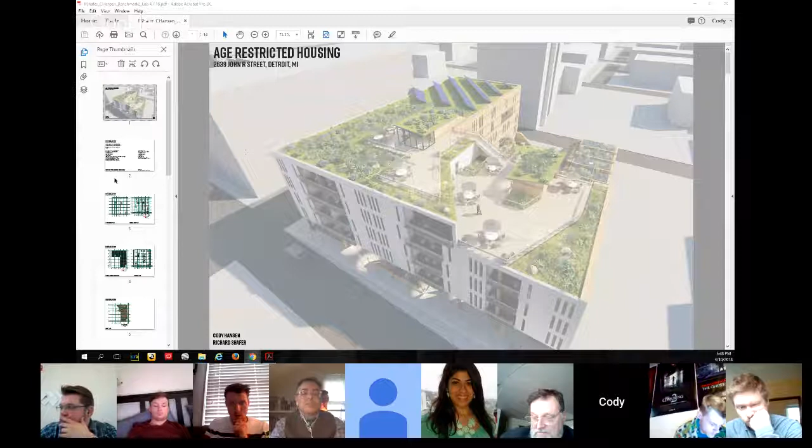Starting off with our structural system, we have the rammed earth that goes throughout all the floors of the building. At the garage and main floor we have concrete systems, and above that we have heavy timber, and those two systems work together with the rammed earth.

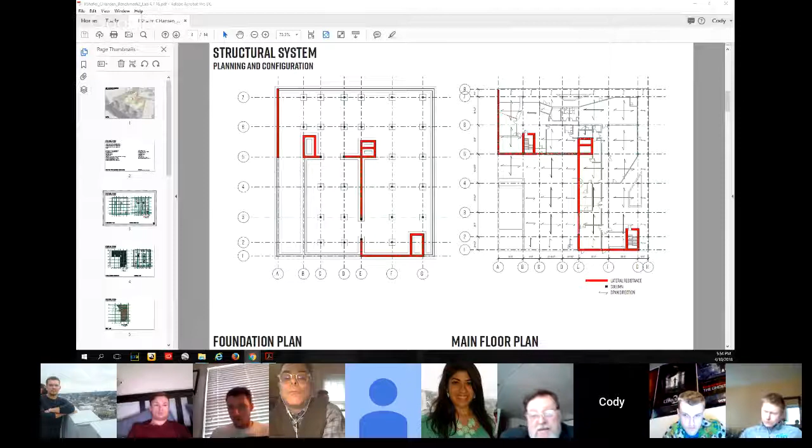Are they in all of the bays? Yeah. Okay, then you definitely need to note that. And look, guys, I'm not averse to having a 3-sentence description that describes something in a bit more detail—you can even use that as your prompt if you're presenting it.

Right, this is what I need to say in 3 sentences—this is how this system works. Okay, thank you. Let's go back to the notion of size and scale again. I appreciate I can see it on the screen, but I do think these could probably be about half the size they are and still be legible and effective. I'm just trying to give you clues on how you can condense things.

We get into the next slide showing their typical residential plan and our garage plan, obviously in the same style as before, with comments showing how the moment connections in the columns are noted. For the typical residential plan, we have the heavy timber beams and columns shown along with the floor trusses. Is this a mass timber system?

Everything except for the floor trusses is mass timber. Okay, so I guess just a graphic issue—when I see the black lines there, that doesn't represent like a joist, does it?

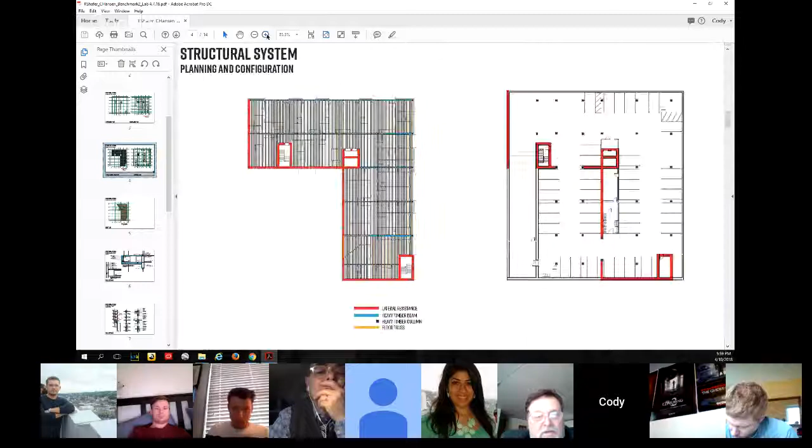Go back to the plan view of the framing for a minute, or the typical residential floor. Zoom it, zoom the upper right corner. Zoom the right corner, between 6 and 5, and G and F. To the right, yeah, we're at 6. Yeah, right there, zoom that more. Okay, just a second, show me the balcony there.

Okay, yeah. So I'm looking at what look like to be the large trusses parallel to the balcony, correct? Yes.

Now, when I look at your detail, can you go to your detail? Zoom out please, sorry. It appears to me on the right side the truss is perpendicular to the balcony. Good point. Okay, I'll let you go from there.

And I think, as Professor Farlow pointed out last time, there are some issues of insulation. I'm not sure you need to fully insulate the balcony per se, but I think you want to insulate it close to where the exterior wall is. Does that make sense? Yeah.

And also, of course, there needs to be the insulation shown in the walls, right? Well, they do call it out, they just don't hatch it, it seems. And also remember what we're asking for. We're asking you to meet the ASHRAE 189.1 code for the R value, right?

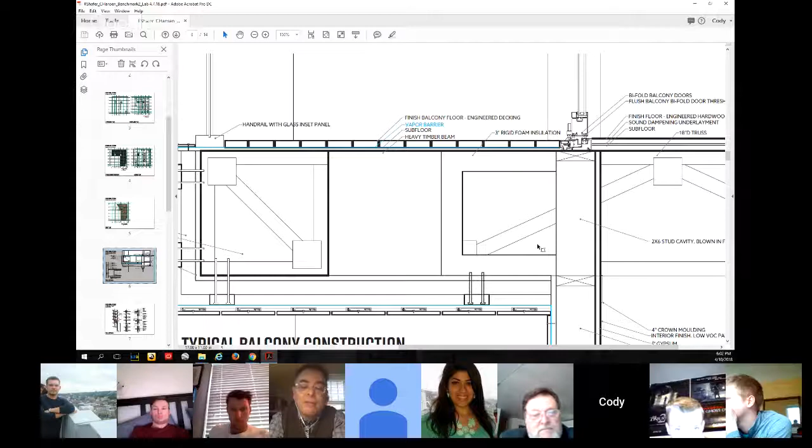Well, first of all, the code does allow a 4-inch offset or differential between the main floor and the surface of the balcony, and that's actually to everyone's advantage, particularly in any environment where you're going to get wind-driven rain, which is pretty much anywhere, and snow, which is pretty much where we are. So when you have a condition that achieves that 4-inch offset, it allows any standing or ponding water or snow to be less inclined to migrate or wick into the interior environment. So that's maybe where you were headed, Dan.

Yep. Also, I want to find that I have a level base when I drop that bottom condition of the slider in, and I'm kind of wondering what that, I don't know if you'd call it a sole plate or a sill plate, would be like if there's nothing above it. So I guess this question is also starting to go to the section and what the structural system could be. I know what you're thinking it is.

It's these pre-engineered wood trusses, but maybe because the balconies are so shallow, we could header off these balcony areas and do incidental cantilevers, basically 2x12s set at an elevation that allows for or promotes the offset, and the thickness of the balcony could be much less because you're only skinning a 2x12 structural deck. In the north-south axis, you could sister 2x12s to those pre-engineered trusses in order to let them outrigger and become the balcony, and header them off of the trusses running in the east-west direction, I believe.

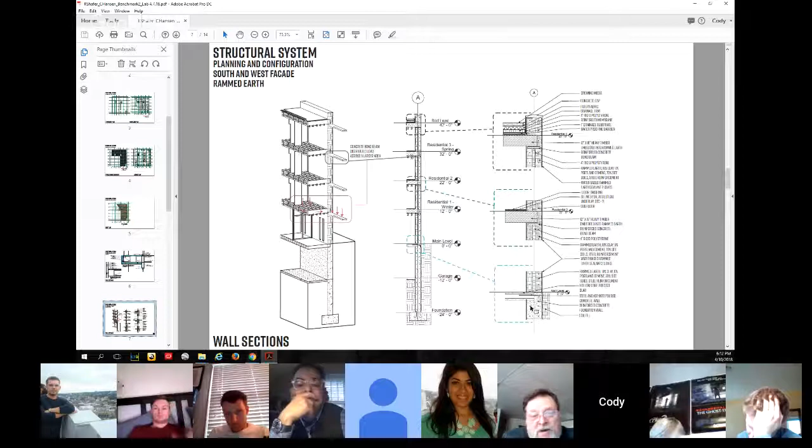Can I zoom on the upper right? Green roof side, well no, to the right, yeah. So I'm seeing the 12 by 18 heavy timber, and it looks like you cut right through the timber beam in that section. Is that right? Yeah. Normally when we see a building section, it's not through the structure. Right, so in other words, you're going to be in front of it, and then we see the other things framing into the heavy timber, right? Right, this was just to show us how this was being embedded in the rammed earth wall.

I understand. Okay, and then it looks like the thickness of the rammed earth to the right side of that beam is very small, is it stable like that? That's still about, I guess I need to double check that thickness there. Okay, but embedding it in the wall, you still have probably 4 or 5 inches worth of that. Usually too, when something's embedded in the wall, there's always a gap around it for movement and tolerances. So you're showing like no gap, right? Just completely packed, so we should provide some kind of slip, I suppose. Yeah, okay, and looks like a reinforced concrete bond beam is being called out there, right?

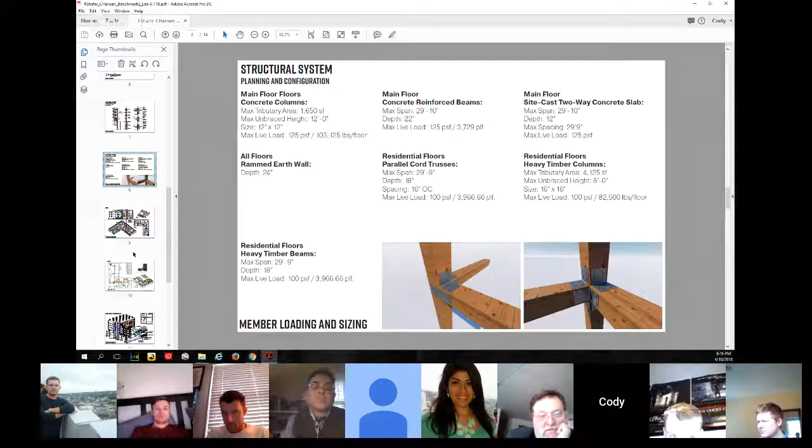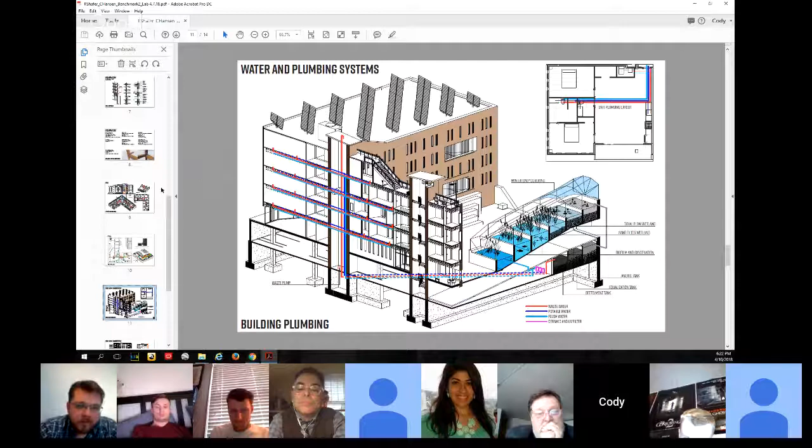There's not really much else to discuss on this particular drawing, we'll move on.

The water and plumbing systems. This is the fire suppression here, okay, and how we've laid it throughout the apartments and the sprinkler heads within the apartment and our hour separations.

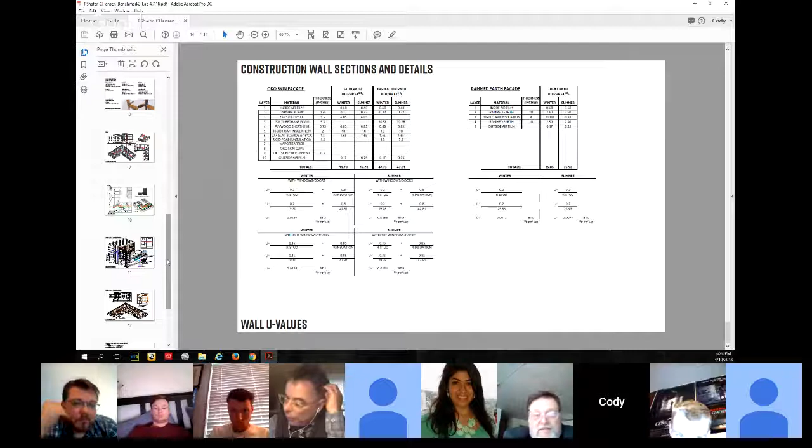Mark, are you with us? My only point is that on the upper right section drawing, where you brought up the point about insulation thickness based on 189.1, I have a feeling that 4 inches may be the base dimension, it actually may be more than that. I think that's what Professor Farrow is saying. That's what I'm getting at.

But also, the roof is going to have to drain, and usually the insulation provides the drainage profile, right? So we'll do saddles, guys, to promote that drainage. There actually may be 6 inches of base insulation that achieves the design value you need up there, but you may have another 6 to get that drainage to the low point, which is where the roof drain is. My point is that ultimately that parapet may need to run up higher vertically, right?

And so that's just something that you need to be alert to. You all need to be alert to that.

In this particular detail, we used a 1-inch drainage substrate on top of the waterproofing barrier. I didn't know that it was typical to use the insulation as the drainage layer.

Well, there's 2 ways to do it, right? Like if you're doing a 1-story Kmart, do we even have those anymore? So Best Buy, no, we don't have those anymore. So if we're doing a 1-story commercial building, we'll profile the steel joists, right?

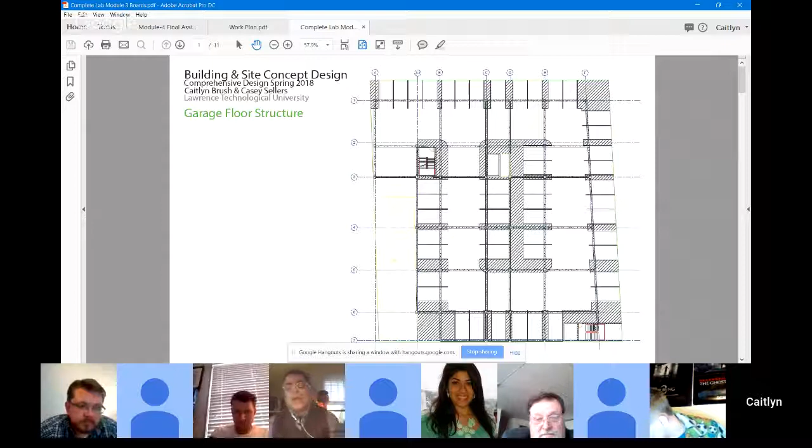You actually have two — oh, you have an A, 8.1. I see that now. Okay. What I liked about the column sizes, the column bubble sizes on Richards and Cody's, is they were a little bit larger than customary, especially if you're going to reduce these down. Scaling up the column bubbles so critics can refer to them in conversation would be courteous.

Can we scroll down to the lower right, please, and zoom in? I'm sorry, I'm going to pick on things here, but we're getting to the end of the semester. So, Professor Farlow, do you understand how that stair would work? Or is there a structural member going through the stairs? It sure looks like the angled column or beam that runs parallel to John R is slamming into the stairwell.

So there's either got to be another column at the stair wall to receive it and end its run, or we have to slide the stair. Okay, yeah, you understand that? Yep. So that beam has to get headered off — it has to end, and transfer that load. So a column or pilaster there to receive that thing.

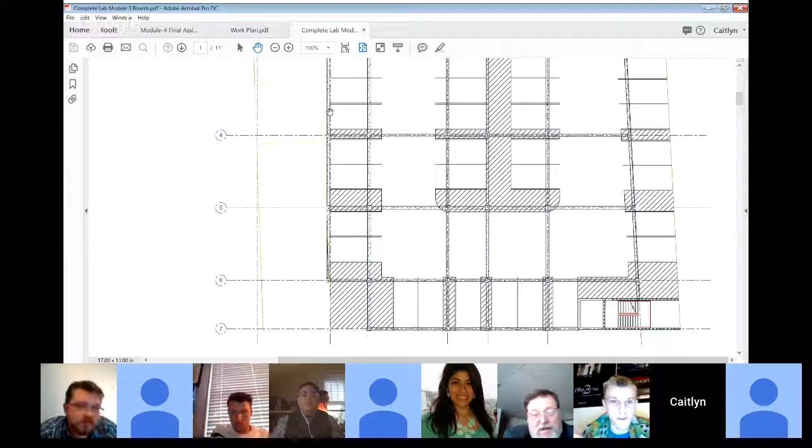So while we're on this topic, if I cut a section through this building and look at the area to the right of the wall along column line 1, going up to the property line, obviously there's going to be a slab roof there, correct? Wait, along column line 1 — one that's at the top. Go up to the top, between column line F and the far right hand edge of your parking deck. Yeah, there's a slab there, correct? Yeah. Otherwise water is running into your deck.

Yes. And I don't know, is that slab part of a floor above, or is it part of an outside green space or walking area? There would be walking area. So it's outside? Well, no, a little bit of it is.

So F is offset about 2.5 feet in from the wall because our first floor isn't the same as the residential floors. So that's about 2.5 feet extra to the right where the residential floors would be, but past that 2.5 feet towards the site line would be the sidewalk area. Is the load going to be transferred from the residential floors up above down adequately?

It should be, I hope so. But let's go to the next level above that then. So you can see to the right of the column, that's where the storefront is.

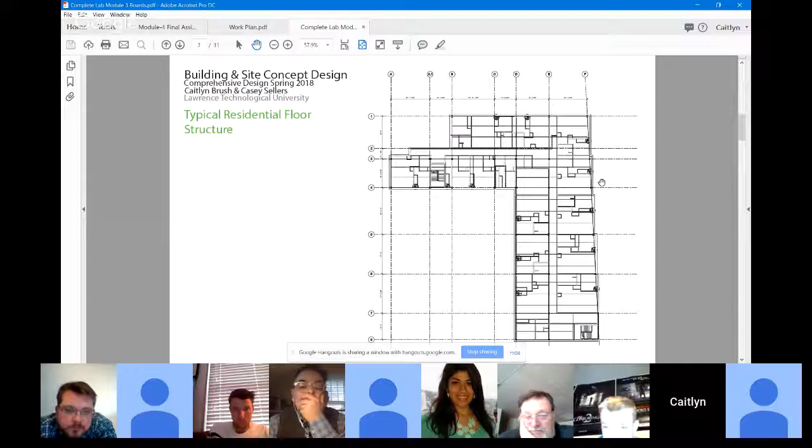Well, it's hard to see on here, which is kind of obnoxious, but I did highlight the core areas, and I haven't chosen which walls in particular, but I have. I see you have some common demising walls that are consistent throughout column 5 and 6, and 7. Yeah, 5, 6, and pretty much the entire. It's too bad 2 doesn't line up, but that's okay, it would have been nice. And yeah, so 5, 6, 7 is the same throughout, and then the entire hallway on the east wing lines up through all 5 floors.

And your structure description, you didn't call out the code issues yet, and you didn't call out what it's made of, is it concrete or steel or what? This is steel on the residential floors. The concrete below? Yes. Okay, you got to call all of this out, right? Yep. Are you using the upturned beam for the steel to reduce the floor depth?

We were using the calculator you sent us. I know, but of the different structural system options I gave you guys back in module 3 in the studio, one of them was steel—it's called an upturned beam, similar to the delta beam but a variant form for steel. Did you look at that? No, we did not. That might have been a way to reduce your floor-to-floor depth.

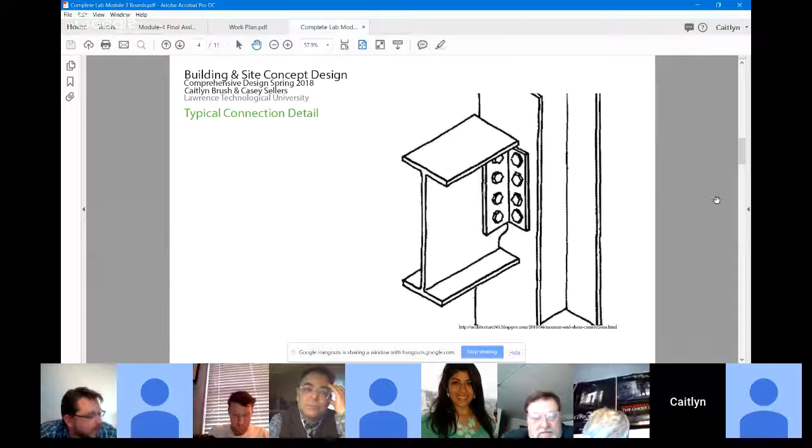And then we were just doing a typical bolted section, since we're not using a rigid frame. That's a pin connection. Right, and it's way too large—obviously. When you mentioned it at the beginning of class, I knew exactly which drawing we needed to scale. You know how to draw that for your real project, right? It would make more sense to see it in the context of your real project.

And then I think we get into plumbing. So we have a main shaft with HVAC and plumbing at the alleyway, with cold water supply and hot water supply. So you have a central unit then? Yeah. You need to call that out—tell us what that central unit is. Is it a high-efficiency gas-fired boiler?

And then those pipes are just running underneath the slab in the drop-down ceiling, which I think maybe the section could be blown up so you can see that, or at least made a little larger.

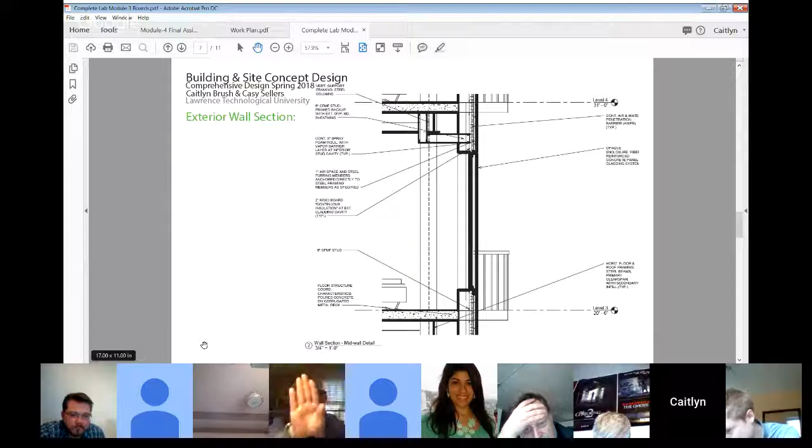Caitlyn, I don't know if you saw my note before we went live, but I still feel like the window itself, as a condition, needs to sit on the studs, not on the insulation. So I think that has to push in more. I changed it. Okay, and that also means that the horizontal conditions of the window, which we call the lintel or head, and the sill, need to be deeper. So do the jambs that run vertical. But those are opportunities for you to emphasize their presence on the skin.

And I'm not just talking to you guys. If you've ever looked at some of these more contemporary buildings where windows are highlighted, think of highlighting in terms of the color orange or the color yellow, where the window becomes like a picture frame or an exaggerated sun shade, like a brim or a blinder. You'll see this in the work of some architects, like David Baker, Loha, for example.

Some of the case studies you guys have pulled up are exaggerations or extensions of the jamb, so those are design opportunities for you guys. And there's not a clear indication of a lintel yet.

Yeah, that's correct. I also see insulation being identified in the notes, but I don't see the insulation in the wall in some cases. And then again, immediately after you draw this, or even before, the question of what is my R value needs to be evaluated, right?

I would say cut that in half, make it about half the size. And then put that wall section you've got drawn on the left side, put it right next to it so that all the horizontal elements align.

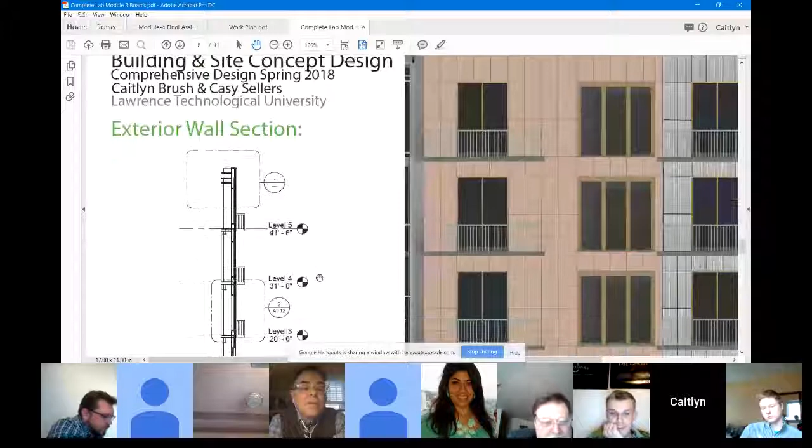So now going back to that issue we talked about earlier today when you were showing me the parking structure and grade floor structure, do you understand the problem there? It's like my building starts disappearing into the ether at the parking level. Yeah, there should be another wall. You understand that, right? Yes.

Okay. You've got that exterior storefront glazing sitting on a transfer beam, a consistently thick slab, when in fact there has to be some structural response to that at level 1 and in the basement. That's what I'm saying. Right, and that whole section needs to be enclosed, and it's not. Yeah, there should be a retaining wall to the right.

And also along this drawing, you'd probably want to know where the sidewalk is. Okay. Yeah, this thing needs to be just a little bit wider. You need to show more of the interior and just a skosh more of the exterior at -9 to 0. Yeah. Yes. Okay, thank you.

And I understand these are the hardest things you're going to be working on in terms of technical detailing at this level and for this class. Professor Farlow and I get that, we get that. So don't feel bad if we have a lot to say. Okay, yep.

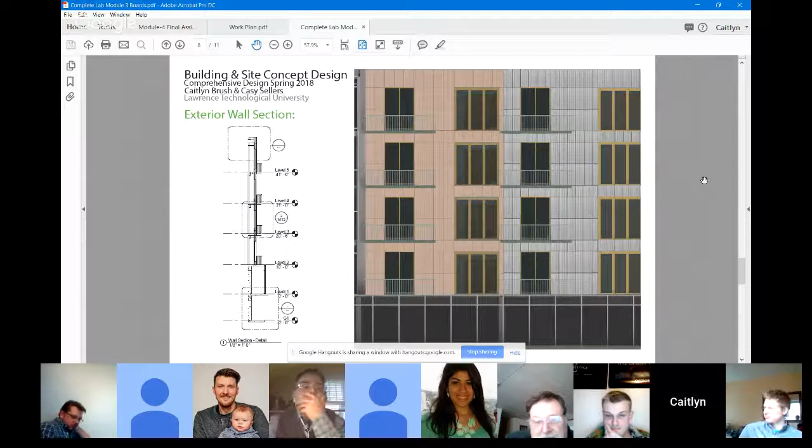You should lead your discussion about HVAC with that description: my system has these elements, this is why we selected it, and then proceed to explain. Does that make sense? Yeah.

I want you guys to make sure you see that stuff when you're putting it down. All of you, I'm not just saying it to you two.

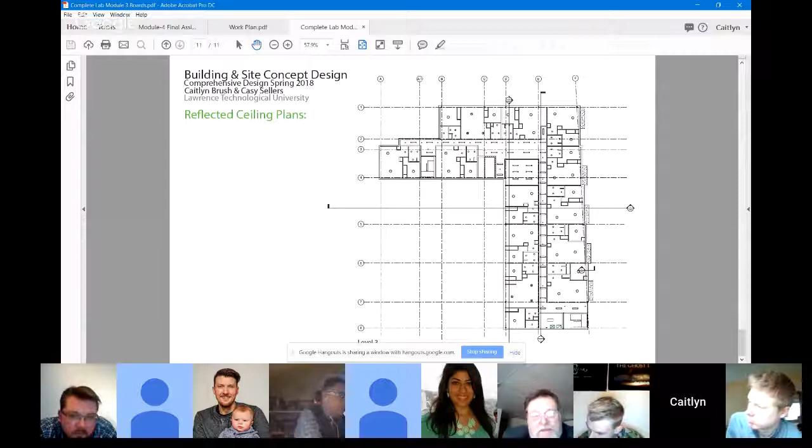Okay, keep going. Probably emergency lighting - I don't know if you need to show it, but there's going to be emergency lighting in the hallways and in the exit stairs. Might as well just call it out. Yeah, I wasn't sure if I should add that in. It's not a difficult thing to do. That was the last of the drawings.

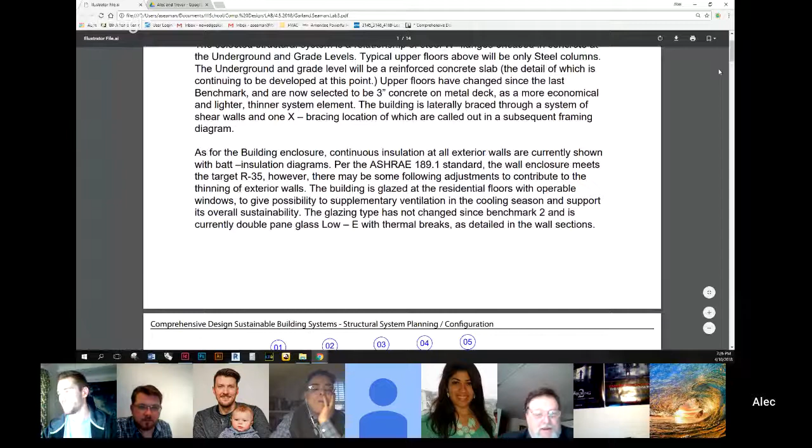Okay, go ahead. So I'll start with ours. I won't read all this word for word, but we have a brief description of our structural system. I will note that there's one change from the last time we presented this: on the typical upper floors, our floor framing system, we're proposing to switch to concrete on metal deck because of a conversation about the economics of the system I had with one of our structural engineers at work. But at the parking, first floor, and underground floor, we're sticking with reinforced concrete slabs.

So going up to the upper level, why would you have the metal deck with a concrete system? Switching to all steel up above, all steel for the beams and columns, but for the floor slabs proposed to switch to concrete poured into metal deck. Yeah, that's basically a steel system. Okay, we were talking earlier in the semester, we were considering the post-tension slab, and now we work with the steel columns. But I just wanted to make note of that.

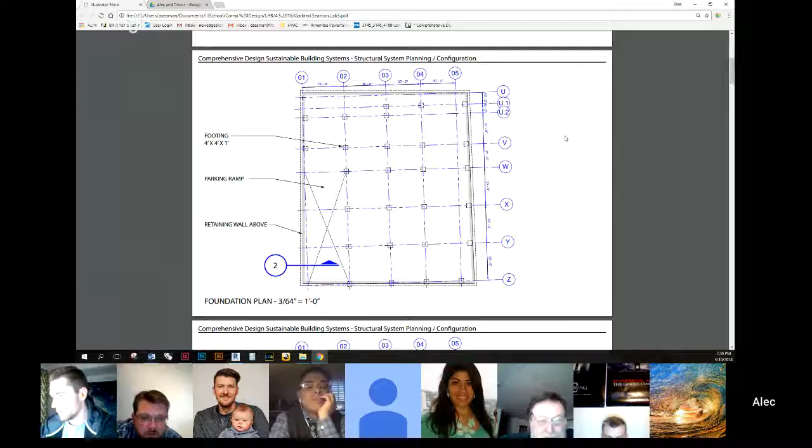So then I do think the inclusion or acknowledgement of the pilasters along those outside walls, even if there are beam caps or beam pockets there, it's still probably a reality in this project. Okay, and along column Z? Yeah, column line Z, I definitely think along column 1, along everything on column 1, given those spans. Okay, go ahead.

If you want to go to the next sheet, Alec. The one after this? No, sorry, that one was good. So then this is the parking floor framing plan where you can start to see, Professor Farrows, what you mentioned — a bit of a bizarre condition up at U to U2. That was because of the angle we had to introduce another column line so that we could fit the parking in, and that it would work with the orientation of our column grid. I would also say along column line Z, those long beams, you do need a pilaster condition again. Okay, I have that written down as a note. That's okay.

I think a watermark of the floor plan would be helpful - I'm hesitant to say that, but at least show us the vertical core elements like the stairs and elevators, since they're going to be chases there and will have an impact on the framing plan. You can't tell the engineer what the framing should be unless you show them. That's something we have to insert in there.

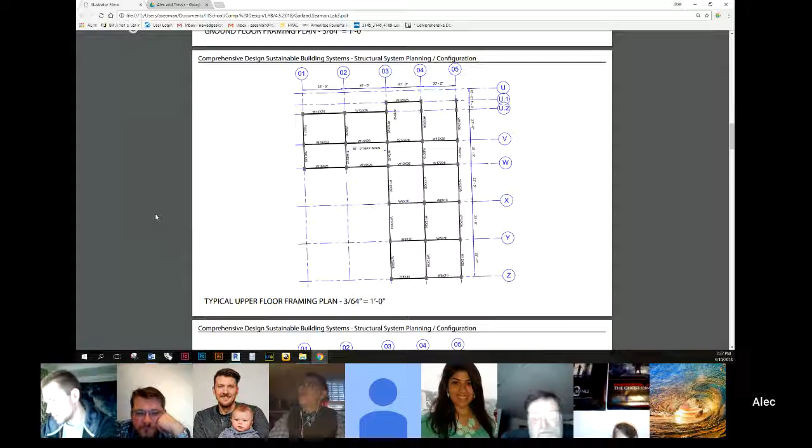Okay, I'm going to look your image up. I'm struggling to remember what this looks like.

I'm sorry, who are we looking at at the moment? This is still me. So you're looking for the floor condition in the plan? Is that it? I'm going to show you.

Okay, so this is the second floor. This is an outdoor terrace. U1 and U2 are here, between 4 and 5. But that's a terrace that has a slab with an edge. Yeah, so there's steel but there. On the next floor up, it's open here. So okay, but then I think U2 is in. Right, yeah, U2 has a beam. It would be in U2.

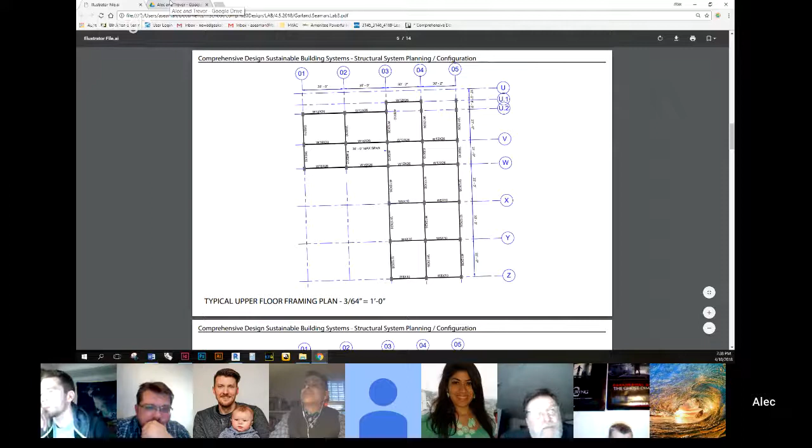You guys have got to put chords and struts on the edges of floor diaphragms, for stiffness and stability, okay? There may be some cases where you don't need to do that, but for the most part you do. Okay, yeah, that makes sense now that we have the reference to our floor plans.

Alec, do you want to go to the next one? If you really didn't want to see it, if you'd used an upturned beam in steel, it would kind of disappear into the slab depth. Okay, but yeah, I'm looking at plate 14 in your slide deck from the last benchmark. You definitely have beams there, you've even drawn one in the rendered axonometric, for along column line U2?

Yeah, okay, so that one needs to find its way in. And you'll have it at, I think it's U1 as well. This is the U2 column, yes sir. And U1 is north of it. Double cantilevers are not easy to do, they're difficult to do.

Yeah, that's right, optical illusion. I didn't even catch that you're not indicating a column at the hard corner underneath the upper two floors. The way that you will sometimes see them done is they literally take the two walls you're looking at and make those two walls into trusses, that span back to the column in the adjoining bay to the right and to the left. Okay, that is not indicated necessarily.

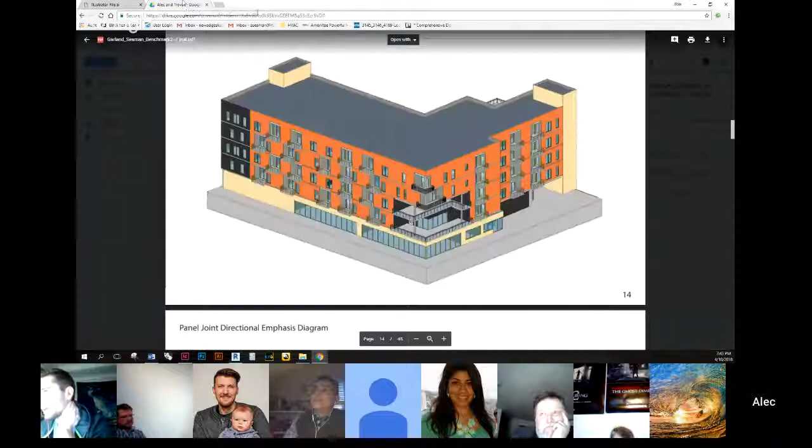Unfortunately, with our whole well, you do have at O2 between V and W, and that I'm not sure, and O3 between. I don't think you could put a demising wall in at O2, Mark. I think they use at least between V and W, yes, but I don't think it exists in that one. Right, but I guess I'm just okay.

But we'd have to revisit the program if we were going to do that. The only thing is it wouldn't work on the ground floor as it runs through the common room. Right, but I'll note that as something we can continue to look into.

I'm looking at this, and I think that maybe W could be a line. W could be a line. Yeah, and I think that's one that they've got - other than the bottom wall of the elevator. Other than that, you don't really have much except for O3 between U and W. Those are the two that could be set up as some sort of shear wall.

Or diagonally braced system. But again, the rigid bays are at least less obtrusive, and you can kind of put them anywhere. So I would start with the boundary of the exterior as a possibility.

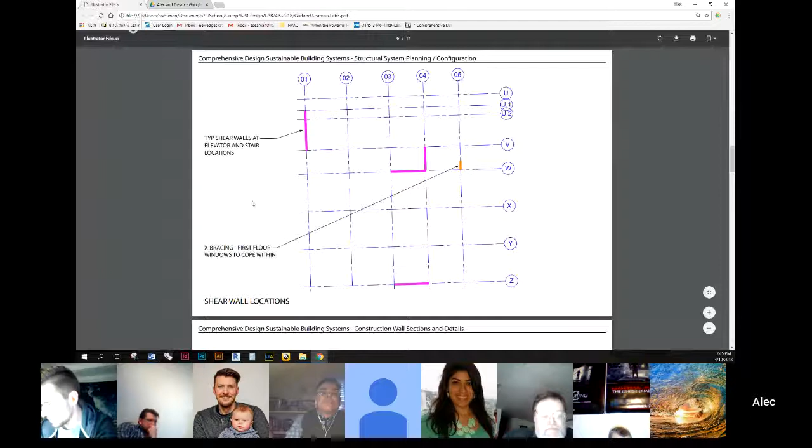So here we have the wall section and then the partial elevation. I think the elevation I can probably colorize to give it a little bit more meaning and information. It looks like things are dropping off on you - yeah, the column lines for some reason I could not get to return, but I'm looking into that. These are still continuously being developed outside of the PDFs as well.

But I want you to go to that lower left-hand side corner of the wall section, because you and the prior team have the same issue. Oh, you're talking about not showing the beams. You've got the projection of the boundary condition of the wall and the floor of the parking that extends beyond the structure, right? Does that make sense? Something's got to happen in there.

Yeah, there should be a beam, I think, showing beyond that carries the load over to the retaining wall. I'm also looking at the fact that the exterior wall is eccentric of the beam. Can you zoom in on that wall section to the left? Go to the lower left. Yeah, you've got about an 18-inch or 1-foot offset from beam to wall above. Do you see that?

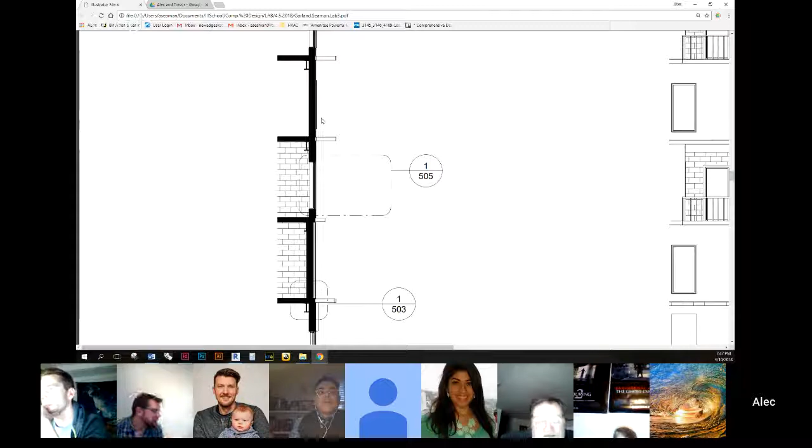Why would it be offset below but justified above? Well, it's close to justified above, but it is in the same location. But I would still see - I think it's just that the columns aren't showing up. Yeah, I think that's my point. At the top of that drawing somewhere I'm going to see a column bubble, and then some lines leading from that I-section back to where the column is, because it tells me it connects back to it.

Here's one more comment I'm going to make for everyone, not just you: do not trust Revit. I think we all know by now that things we see in Revit are not necessarily what we would expect to see. For example, things that you don't cut through, let's say concrete, shows up with the concrete stipples that looks like you have cut through it, right?

So I know it's easy to jump into Revit and show the section because that must be what really exists. And it may be, but it's not going to be in terms that Professor Farlow and I understand as normal section cuts. So my suggestion is to anticipate you'll be going into Illustrator or Adobe, doctoring those wall sections. You'll be taking out poche or solidity of material where it doesn't need to be there, and adding back lines that don't seem to be there. Things like flashing are not going to show up.

I do have a question to that point. Should we just poche at this scale the elements we're cutting through in the overall wall section, or do you want that to be something that gets doctored? In the wall section, it ought to be the materials in their best description as they are, as they exist. It should be the best representation of the materials as if you were in the construction systems class.

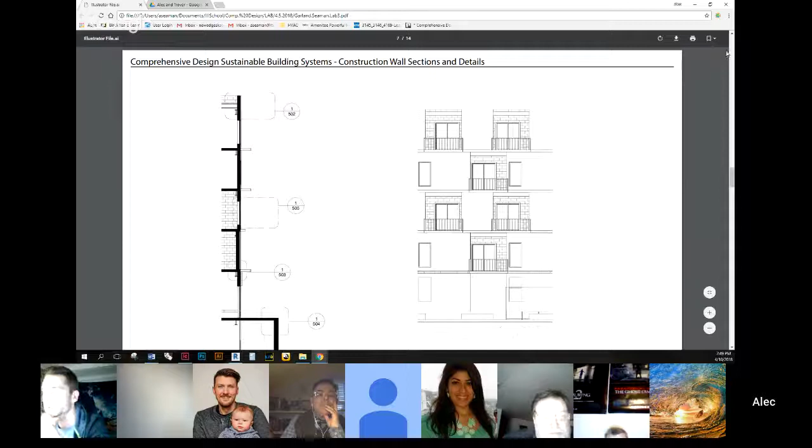That's the best suggestion I have when you're doing the details, wall sections, and enlarged elevations. It's nice to color the enlarged elevations and give some depth, shade and shadow. But when I look at a wall section, I'm thinking I'm in the construction systems class - plan cuts or details. Does that make sense? Yes.

Again, I know these are not easy, we all get that, so don't worry about how many comments you get. It's absolutely helpful. I don't think I have any more to deliver on this slide unless there are any more comments to help out.

Could you zoom that again? Could you zoom the upper left? Is that what that was? You want to zoom up here? Because I kept looking, it looked like a blow-up detail, but it's not that drawing, it's another drawing, right? The next sheet - I think the next sheet, that's the blow-up, the next drawing.

Yes, okay, so again that's great. And remember what we said, show some of these in color, right? Yeah. And I know that all I can tell you is from what I understand, the IBC 2015 codes and other codes are now starting to require that information showing up on drawings. And I know it's not going to show up in Revit, so you've got to go into Illustrator and show it.

So what's the water barrier? It's largely going to be the exterior wall surface, and it's going to switch over to flashing sometimes, right? What's the thermal barrier? Wherever the insulation is - that's your thermal barrier. Then it gets tricky. Your air barrier or moisture barrier are going to be somewhere behind that in the assembly, but they're not easy to call out, depending on the construction. It's important to know whether you have closed cell insulation or open cell.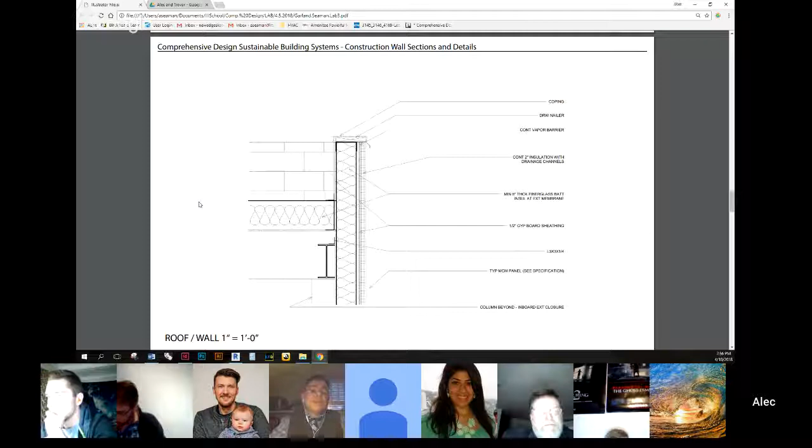So, and I guess if I could maybe give you some advice on this stuff, if we go back one sheet, Alec. Oh, you don't even do it there. Can you go back one more sheet? I thought that.

Okay, so I'm gonna have to have a seance here and bring back like Casey's and Caitlin's section. Their sections had datums, floor lines with targets and vertical dimensions between each of the floors as we went up, so that we knew where the floor elevation was. We knew where the top of steel or top of structure was. And there was always a running string, an out to out, structure to structure, incremental.

And as we continue to get closer to the wall section, we get more specific and more particular with those dimensions. Seems to me, guys, and I'm not just talking to you two, but it seems to me when you're going to embark on drawing a wall section, you start with the stuff you know. You all know where the walls are vertically. You all know where the floors are. So introduce that matrix of

constancy within the drawing. Let those be the construction lines for your drawing, and in AutoCAD speak, freeze those layers so they never get stretched or moved or erased, right? And then build the wall vertically from there, right? That's the way I approach it.

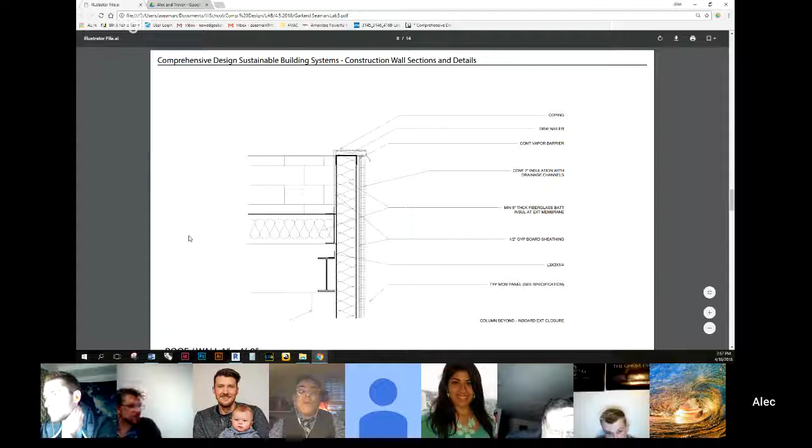If you go to your next plate, right, I want to see that target right there where that steel is, and I want to see where the top of roof is. But you're kind of already embroidering the drawing with notes and leaders, right? And you've given up on top of parapet dimension, top of roof, top of steel. I think you need to have that stuff in play all the time.

So related to that, when you want to study a condition in architecture and the computer takes too long to do it, what do you use?

I'm not sure I know what you mean. When you want to study a condition in architecture and want drawings to visualize that condition, and the computer takes too long to do it, what's the next tool you use? Oh, a pencil. And your tracing paper, right?

Yeah, so my suggestion is to cut your time down. Look at that Revit drawing that gives you the basic profile, then sit down, as Professor Farlow said, and work from what you know should be there as a series of studies, developing the drawing the way it should be. Don't bother trying to do it all in the computer, it may just not be productive for you. Trust me, the envelope specialist in the firm, that's what they're doing. They start with that.

I had a question about the continuous water barriers, air barriers, thermal barriers. Would it be acceptable for those to just be shown diagrammatically, without the specific material they are, just where they are? Well, I'd say the code would ask you to indicate where they are. But of course, in an architectural working drawing, you'd have a note to indicate what it is, right?

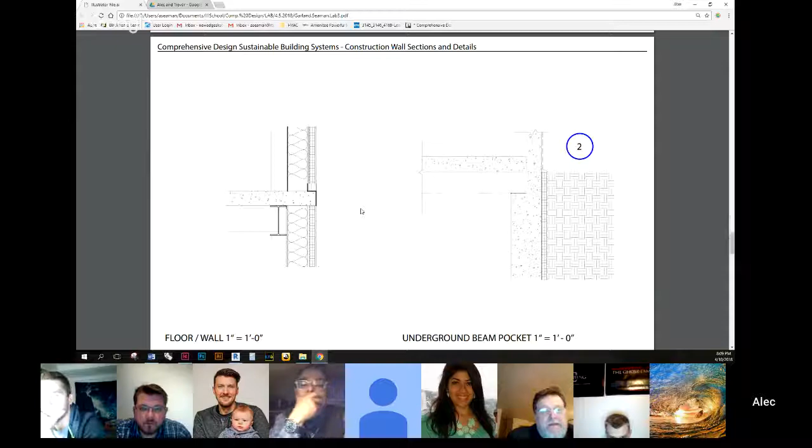Is that wrapping it up? Do we have some more? Yeah, I mean we haven't gotten to my portion yet at all. Go ahead, we can go through it. So I know it'll probably have the same comments as pretty much the last one.

My portion was the lighting systems, the reflected ceiling plans. So these last few are just the reflected ceiling plans divided into sprinkler system, lighting system, and HVAC. I would want to see the whole image of the floor plan in a half tone, so I don't want you looking at sprinkler heads and getting lost in everything else that's in a much darker tone.

The walls are way too dark, the column lines are way too dark. You wouldn't really want to show the poche. The content of this drawing are the light fixtures and the sprinklers, and it probably could be smaller if you need to combine it with other drawings. You'll still convey the information. All the section cut things go away, the big section cuts too. So just simplify it, make everything a half tone that's not essential.

Color's not a bad thing to add. You saw what happened when the HVAC people added color, right away we could tell where things like duct runs were. So if it makes sense to do that, do that.

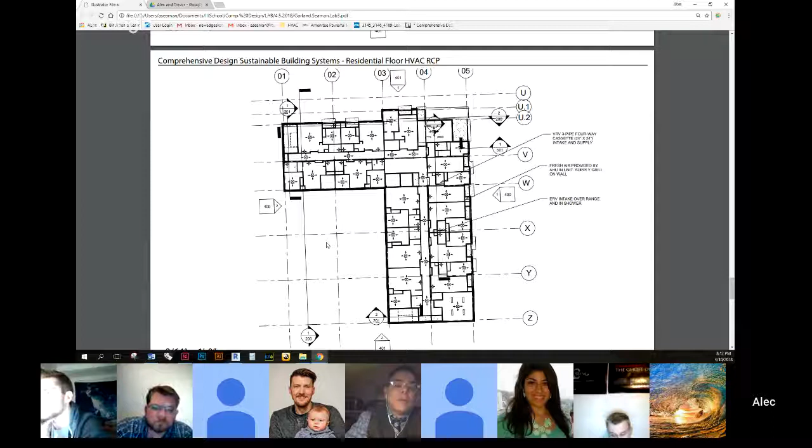Hello? Yeah, did we lose you for a second? I just got dropped. No, you're here, I think we're good.

Yeah, we have the VRF system for each individual unit, and then a central system for the public spaces, the corridors. So I think basically you could just show the common spaces in a plan like this, and then do a blow up of the unit like some others have done today. Okay, because not the whole building.

Right, we did that in the previous module, but I wasn't sure if that's what you wanted or not. Well, I do need to see the whole floor, but for the units, you can just do a blow up of one or two sample units and you're done. Yeah, so we did the whole floor, and then the blow ups of the units. This was our previous one. Then I think you were done with it, basically done, right? Okay, and then the last one was just the lighting.

Okay. Again, I would think that you would probably just do lighting for the common areas or something in this, and then blow up, add, do it at the unit plan scale for the units, right?

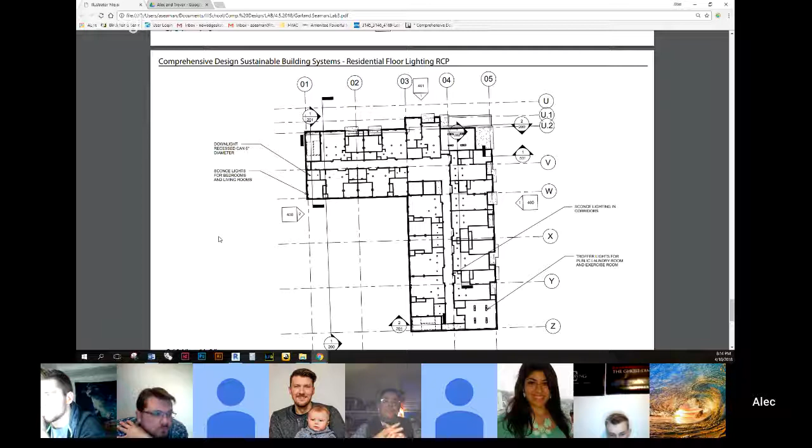Okay. Same thing, make everything that's not important wash out like a halftone. That are important, make it stand out. Can be smaller, probably smaller.

So a lot of the lighting in the hallways actually was not shown, so that's kind of what you need. Yeah, well, I did make a choice to do sconce lighting in the hallways along the walls. It's probably harder to see. Yeah, this is the side.

Okay. Yeah, so that's when you exaggerate them by color or scale. Even if you're not drawing the fixture at the actual size, you want to make sure that we see it. And if you have a little, that's the focus of this drawing.

And if you have a cut image of the fixture, you could show the little cut. Maybe you have a picture that shows what that unit would be like in a space like yours, a photo. Add that, so we kind of know the character of it.

Right. All right, I'm sorry, anything else? No, that's all. Okay, all right.

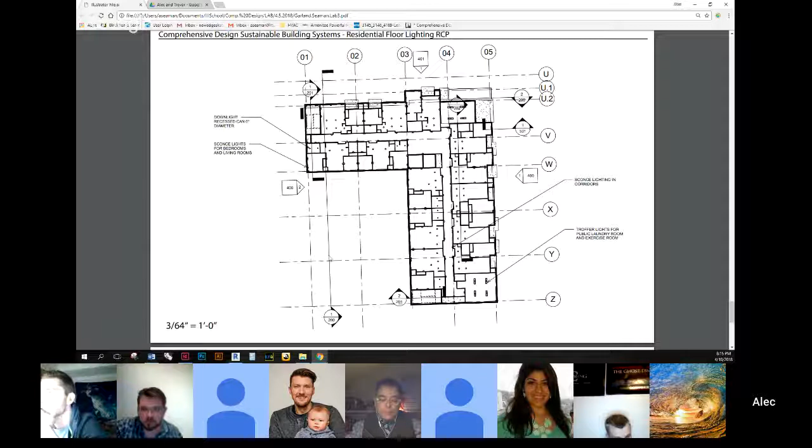Who do we need to go to? John and Stephan. Who's going to present, John or Stephan? I think they're in the same room, right, guys? Yeah. I'll keep, so I'm screen sharing, right? Yeah, so John? Yep, okay. You're on.

Okay, so I'll take over. For our structural plan, we kept the same stuff that we had from benchmark 3, where we had the code analysis. We included the changes that were still under the code required, or the code required heights for heavy timber.

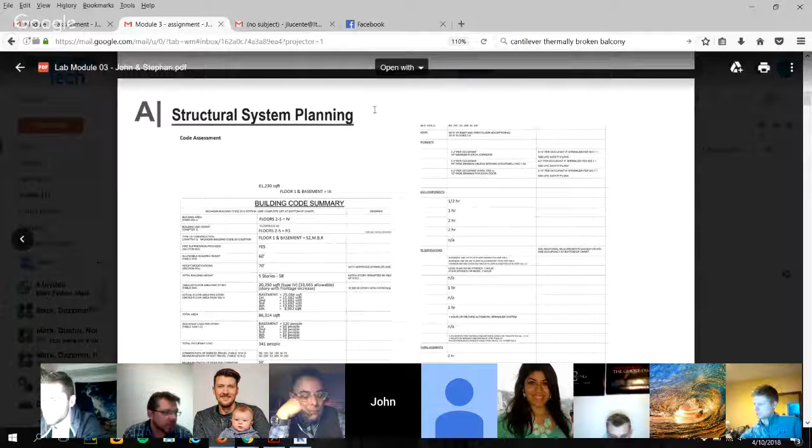Okay, I think the height is 60. We're at 58. We've changed the numbers to reflect how much area is actually allowable as per our area and building type. Okay, so transitioning, I've included the information that we sent emails back and forth on.

Moving on to the next page, it's just kind of breaking up, showing that we're using the podium construction, and we have heavy timber above.

Okay, I would say probably the thing I would say about that image is that it can be a lot smaller. Maybe condense it with the images up above, and probably label what the construction material is for type 4 and type 1.

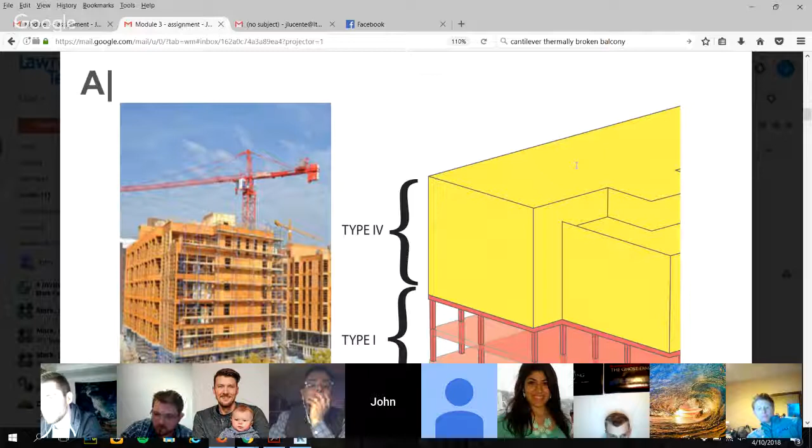Like this is concrete, this is CLT, right? And combustible, non-combustible. But I think it's a useful diagram, but I would make it smaller and put it on the first page. Yeah, and it is graphically a little clunky.

Right, so it's not as elegant as some of your other drawings, but I love the drawing. Well, we're gonna clean it up to show you where we're using the stick frame as the infill panels for our exterior wall facade. Okay, so it's still a work in progress.

The next page is more kind of details in terms of how we chose our CLT flooring numbers and some of the span tables. Okay, transitioning further on, next page.

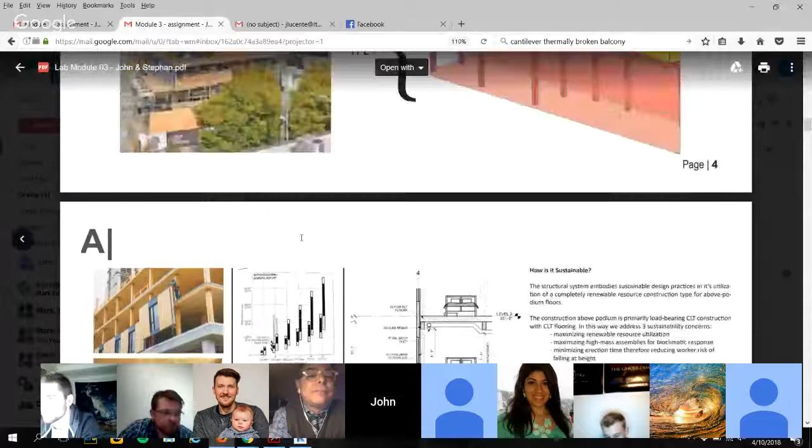Can I make a suggestion? If you use a font on a slide that's less than 16 point, most people cannot read it. My other quick suggestion would be always put a clear header somewhere on the sheet that says what this is, like you did there, structural system planning, right?

But really, that's the building code, right? So the word 'code assessment' underneath it needs to be like twice as large or three times as large, right? Code assessment, and what code was it, right?

Okay, IBC version something, right? And so just kind of keep track with your labeling. Well, once we combine both our studio and lab. I understand, we'll revise it.

Kind of transitioning, next page. So now we're just showing our foundation layout: mat footings underneath our stairwells, mat footing or pad footings underneath the columns, and the trench footing underneath the foundation, the perimeter wall.

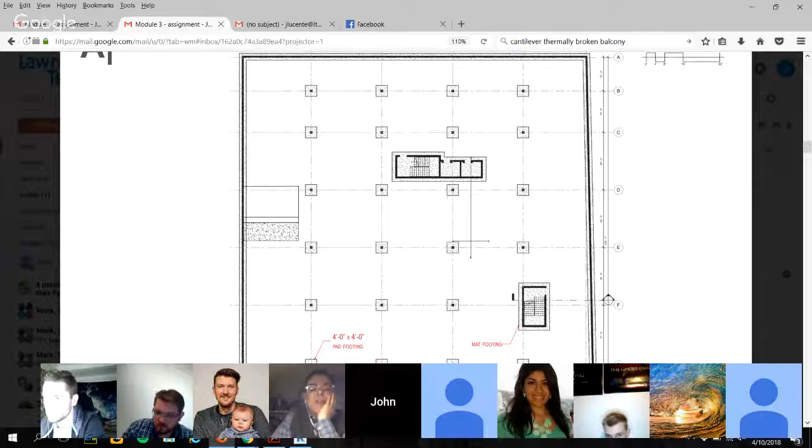This is the foundation plan, right? Yeah, we're just showing where the footings are because the next one is going to pick it up. Oh, okay, so this is not a cut. Is this the framing plan that's the cut? Yes.

So you see my point, though. I do. We'll also create an ISO, or at least an isometric, to give it a better perspective in 3D, and then have the plan blown up with all the detail we need, the dimensions and everything. Okay, so the next page is concrete transfer beams.

I don't remember those before. I guess you had to have them in, huh? Yeah, because we're picking up that wall. Or do we have them? Yeah, we had them before—these guys here. They're picking up the exterior wall that's coming right there.

Oh, so it's just an exterior wall? Well, yeah, but we have columns on top of it, right? Right, so we'll need to pick up that load somehow. And that's also going to be in the parking—no, that's above the parking deck, right? Yeah.

So is that transfer beam going to work its way into the parking deck or no? Well, it's going to clear the parking. We're going to have to have it because I think we originally anticipated we had a little more space into the deck. We need 8 feet 2 for a car, that's the minimum for like a van. These are hard to size, but they're obviously going to be more substantial. I think we had at least 1.5 to 2 feet of play in that area.

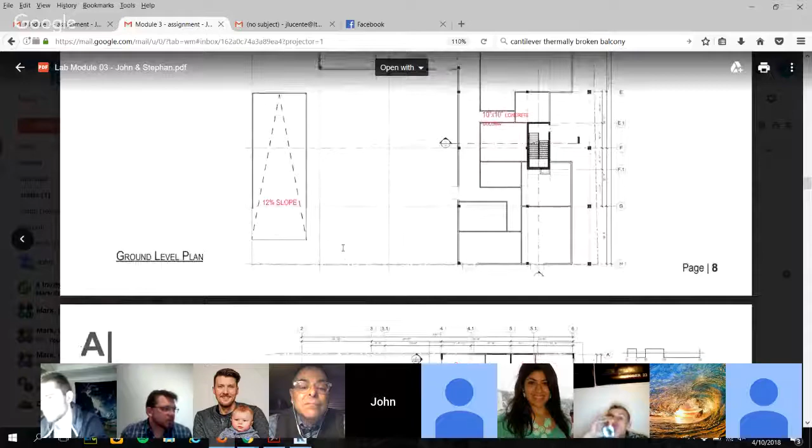Sure. So when I look at the stairway, on the middle left wall I see what looks like a pilaster that's picking up the beam along F, right? Yes. But on the right-hand side of the stair wall, I don't see the same pilaster condition. So what's happening? It's exactly the same thing, we'll pick that up. You see my problem, right?

Yes. Okay, you're showing these structural specs in red—maybe replace the column footprint with red ink, that might help make it jump out more. Bring back what we did for benchmark, I thought that was spot on back then. And anything that's not structural could be a halftone, right? Yeah, that can all fade away—that's not really important.

And then, so again, that upper stairs and elevator, same thing, my comment's the same. I'm looking for that pilaster again, so I'm not seeing a beam running through my elevator.

Okay, all right, so we'll pick that up. I mean, if Mark brings in a guest reviewer and they're looking at this, they're going to ask that same question unless they get a clue that it's not a problem. Yeah, we'll pick up the columns and make the red really pop against everything else. I think that should clarify it.

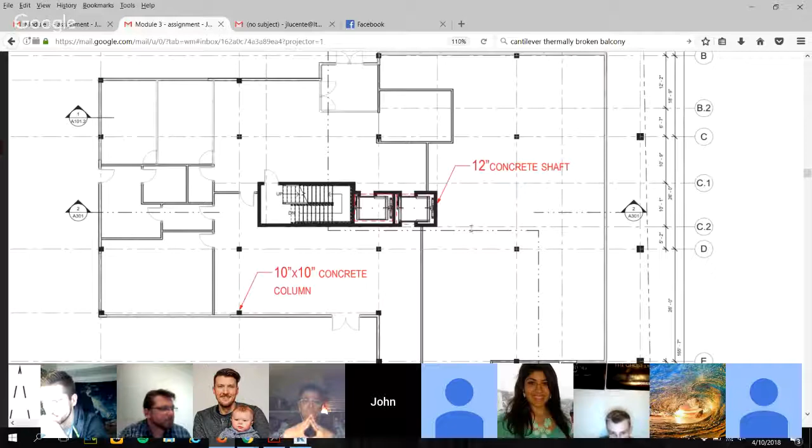And some of the columns look like they're different sizes. Just curious—the exterior column, like column along D6, looks huge, and the 6 column line and the 1 column line too. Is there a reason?

Is there a reason for column sizes changing? Are they being finished with a finished material? I think when we were drawing it, when we used the block, it popped in a little bit bigger. But in the drawings, they should all be the same. Well, the column variation size is almost twice as much. D6 and 3C are significantly different, right?

Okay, if anything the interior would be bigger, and the exterior would be smaller. Well, usually the exterior isn't that large because the tributary area is smaller, but you're picking up the exterior wall, which could add weight since it's timber. Yeah, they just don't seem to be commensurate and consistent. No, I think it's just a drawing error.

Okay, keep going, next page. So here we're showing the 9-ply CLT deck, and the glulam where we need it above the windows. Can you zoom in a little bit?

So for the 9-ply CLT deck, obviously there's got to be a frame-out condition occurring again at stairs and elevators, right? So is that a beam situation again, the edge condition for those frame-outs? We were looking at it, it's more because the concrete shaft is going to be structural. We saw some details where they had an angle connection towards it, like a ledger angle - a shelf angle or a ledger?

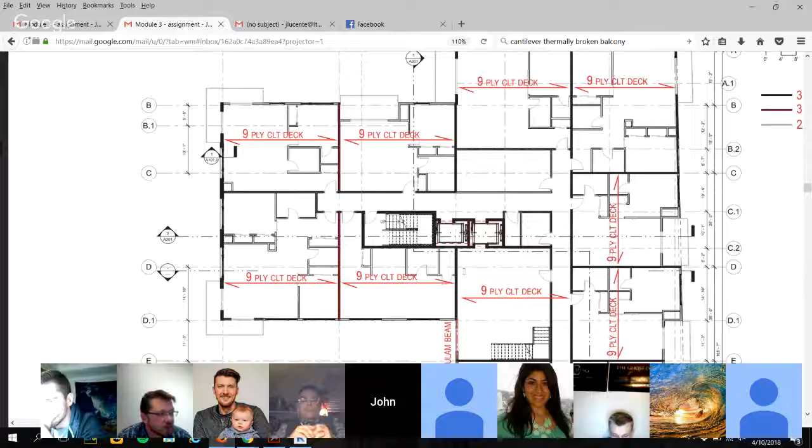Okay, can you zoom out for a moment? We kind of pick it up in our typical details later on. Zoom out a little more, not too much. Okay, so between 3.1 and 4.1 and C1 and C2, almost all of that except for a little space is really a void, right? Pretty much, yeah, it's all concrete. There's just the little area outside the elevator that's got a floor. And I'm assuming that's a drop-in prefabricated stairs, and that's why it just matches up with the floor and goes in, right? Correct, yes.

So that's kind of what I'm getting at - there should be some clarity as to how that CLT is going to be bordered or bounded, so I get these chases. Same thing with the stairs, lower right, and looks like an HVAC chase too, and a garbage chute and the mechanical shafts.

So we'll just add the ledgers that we need to. I think it's kind of like, if you imagine how you frame - I know CLT is different, but even in concrete, when you're framing out openings, there's usually a thickened border condition, a peripheral element around it, right? Okay, I guess we could, yeah, we'll pick that up.

Also in the exercise room floor, you have a stairs in there, right? I think that's like a drop-in type stair. For the first floor, the one we're looking at right now, it should be a deck, and that's going to be just a mezzanine on the next floor up. But just make sure everybody understands there's a 2-story void in there, right? Yeah, correct.

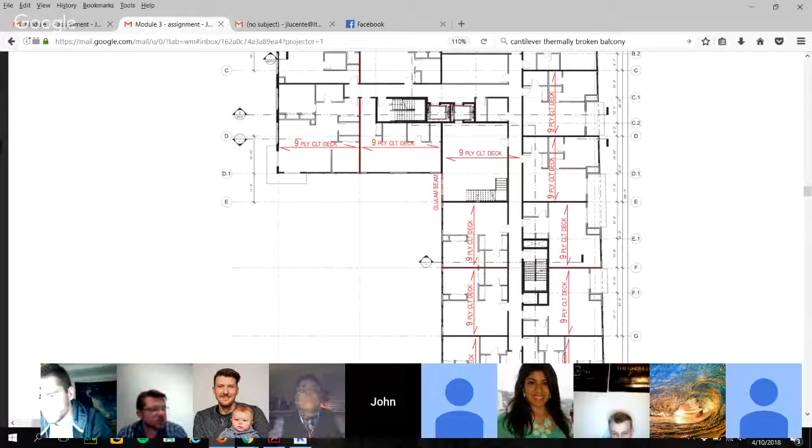Go ahead. So, moving on to the roof, now it's a 3-ply CLT roof. We're just showing the spanning conditions and how the layout would work. So that's the roof level, that's why there's no columns showing up, right? Yes, that's correct. And the fine lines are the roof below - we just wanted to put everything on one plan to make it a little easier.

And then we're just picking up some of the details, the connection details between the floors and the CLT mass timber walls, and the concrete and the CLT and how they get connected together. Are those rigid connections? Technically they are fastened top and bottom, and connected in all three axes - secured in 3 axes. The argument we were talking about earlier was that because we have shear walls in locations, we don't actually need a rigid connection everywhere. Right, that's our understanding - we have shear walls and rigid diaphragm floors.

Right, you wouldn't need to have rigid connections everywhere, but they look like they're rigid. I'm curious, because of my ignorance—the CLT, it looks like it's built like platform framing, where every floor or the column or load-bearing wall only spans one level. Is that correct? That's correct, yes. In that case, I'll say that adding the angles you have there to suggest rigidity and stiffness is going to be good for lateral loads.

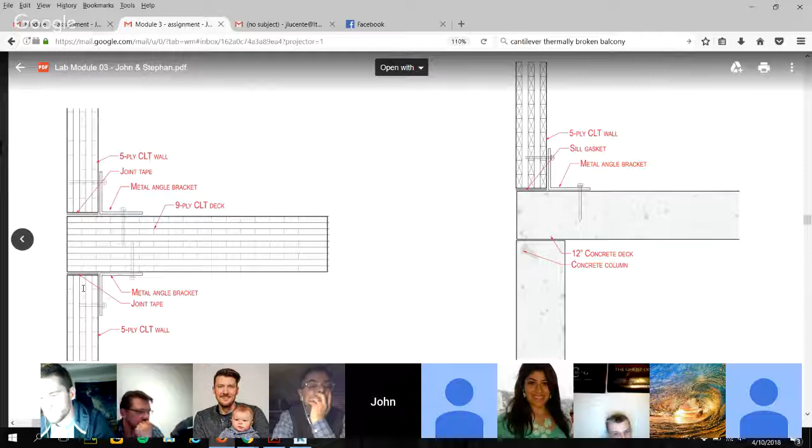Okay, so for example, platform framing, type 5 construction, residential—because of that lack of continuity of walls and lack of continuity of columns, it's not that good for lateral load resistance. So your L channels will help add some continuity and stiffness.

So we would consider the L channels, L brackets, as rigid connections? I'm not exactly sure, you might want to see how they're classified, but they certainly look like they're adding stiffness. Maybe contact Sire, or whoever is promoting this product—I'm sure there's plenty of literature out on these today.

I'm wondering, guys, I'm looking at this wall to CLT floor connection, which is spelled wrong by the way—connection is spelled wrong—but more importantly, for you guys, the floor, walls and ceilings are the finished materials. I say that because the case studies you showed make it clear that this system is attractive not only because it's this authentic structural system that comes from the forest, but also for the finished quality of these spaces. So I want to make sure that's what you're going for.

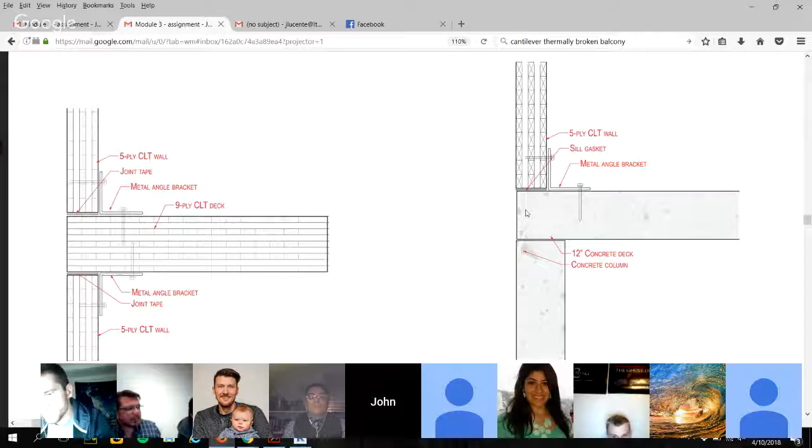But unless there's a wall or something abutting them, they would be seen, exposed. That's why we had—I'm just suggesting a heavy duty baseboard would allow you to basically have your electric run concealed. Oh yeah, you already get this drawn with the wall. So those metal brackets are going to show up in my space though.

Yeah, and I think that's part of the charm, right? The real surface material is the wood—the wall is wood, the ceiling is wood. The brackets are there, they're evident—they're going to be under the rug.

What if we recess the brackets with the system? We could recess the brackets a bit. You think you could carve out the top lamination to drop it down? I saw some column details where the mount for the shoe or anything is recessed in, so it's flush, and we could do the same thing over here. Yeah, these are good considerations to give if you're talking about exposing that.

So this is just showing us the CLT and how we're using the ordinary frame around the windows, just to simply demonstrate that.

So these walls aren't load bearing? No, these all are carrying wind load to the facade. And the insulation gives us the ability to insulate the cavity if we need to.

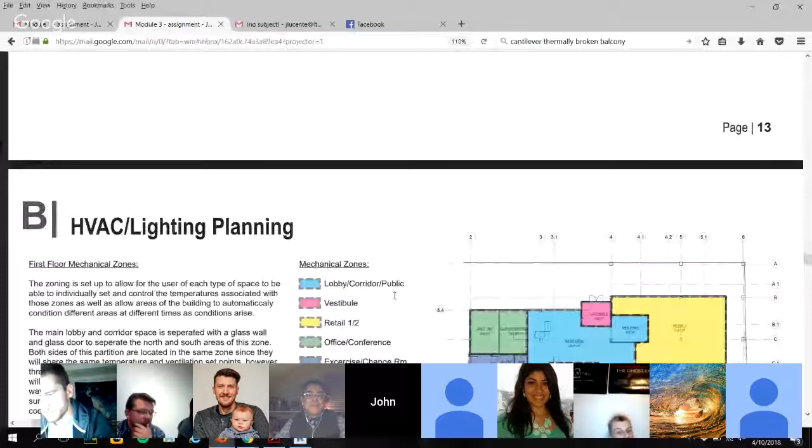Okay, so this is getting into our HVAC and lighting section. This first plan shows zoning of the main floor, breaking up the main corridor and lobby space in blue, with retail space, mechanical, and tertiary support spaces in red, because we don't want to mix that air with public air. If it's a mechanical room, or especially the trash recycling room, we'd want it on a separate zone, plus there would be different set points for these different zones.

One zone is for the lobby and corridor public area in light blue, where we've got a glass wall and glass door separating the north and south areas, so that we can break up that zone into two different areas - north facing and south facing - as the south facing will get more sunlight in the summer.

Are vestibules typically conditioned? I want to say I don't think so. I'm not sure they are. So, no, they're not - I think they're probably just white or something, not conditioned. I can't think of any cases I've seen where they've ever been conditioned.

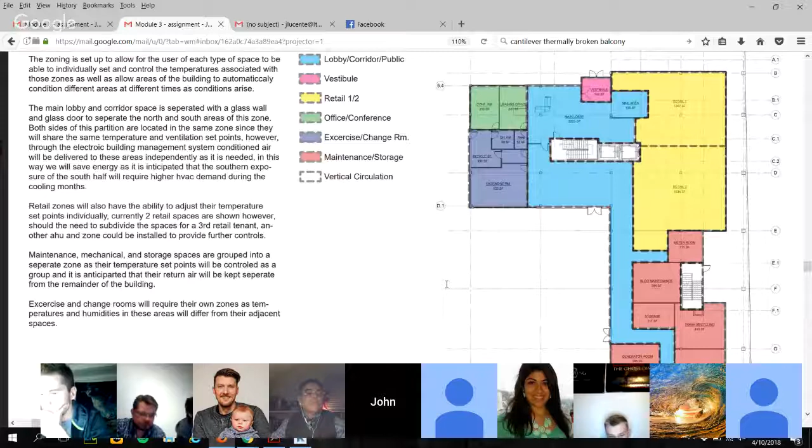I think what you're doing with the narrative portion is exactly right - you need to describe what the system is about. I would add some headers to the various sections of it, because right now it's just one running stream and I don't know what the subtopics are. Probably the first thing is just to say what is the system type, what are the major components and where are they located.

I chose this because - this is the list that, as you were asking questions on the lab questionnaire sheet. But for our final presentation, it'll be a lot cleaner.

And then this is just continuing with the zones on the typical upper floors. The residential area is its own zone because we're using the Magic-Pak system. Then we've got the public zone, and in white is the elevator/stair zone - that's got to be a separate zone because there's higher pressure in those areas, the vertical penetration.

And also the laundry shaft and the mechanical shaft, that wouldn't be conditioned, would it? No, it wouldn't. I just think it's a white zone, just like the stairs. So everything, all of our vertical penetration will be in white - if it's not a space per se.

Well, the stairs - oh, the elevator isn't conditioned either. Then the stairs are conditioned, so I've got to change that. Well, it needs HVAC because it has to be at a higher pressure - oh wait, is the elevator a pressurized shaft? A pressurized shaft, yeah. So just the stairs.

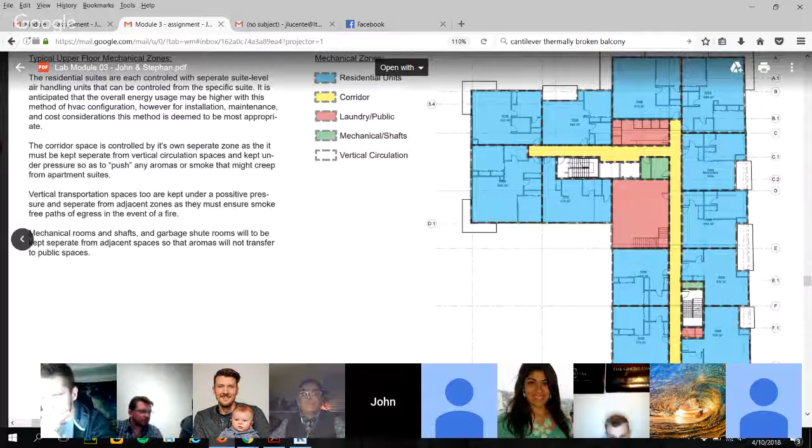No, but I think your HVAC and mechanical shaft is just white - I don't think it's tempered, it's not a zone, no thermostats are going to it. I didn't think of that, so I've got to change that, I've got to update all that.

Penetration, white. Okay, zones - think about it this way: if you call it a zone, it's probably got some thermostat control associated with it. If it doesn't, it shouldn't be a zone.

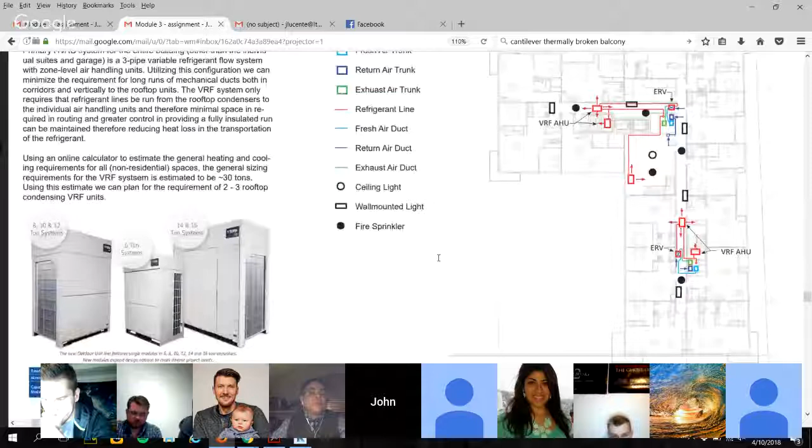All right, moving on. This is our typical upper floor reflected ceiling plan. The HVAC shown here is the same as the last one, the VRF, variable refrigerant flow, running to the different air handling units. That's the same thing we've been talking about. We've just added lighting in the corridor, as well as sprinklers.

Corridor lighting spacing looks pretty large though. It is, yeah. I would really wonder if you're going to get adequate light in the corridor with that spacing. I was thinking about that too. You could probably double it and be okay. I think that's what I would be thinking about too.

I thought maybe because the ones I'm showing here are wall mounted, so they're like wall sconces basically. But if we had those, as well as maybe lights in the ceiling, since I think we're doing a drop ceiling in the corridor. Sure, but my gut reaction is the spacing of those is too far apart to really get a decent, safe distribution of light. So if you want to have a product cut or something, you can tell us what that is. We should do that, yeah.

And of course, is it a low energy fixture? In the notes I was just saying all LEDs. Okay, but we should call that out. I mean, I would say the same thing in that one space.

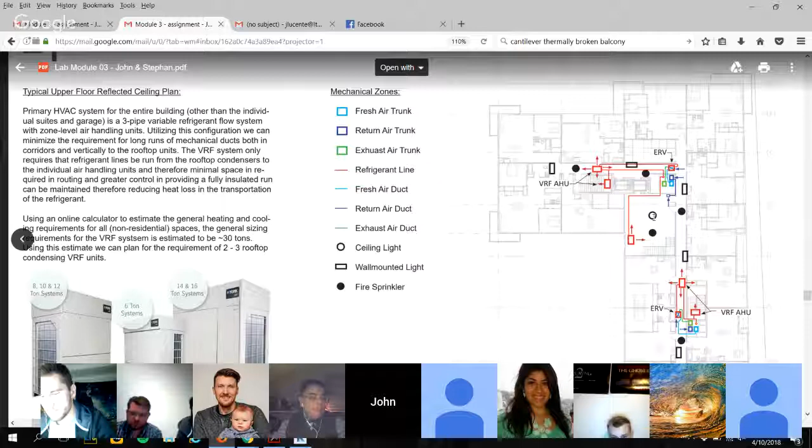Is it the gym or the laundry? There's like one fixture there. Yeah, we'll detail that out a little bit more. I know there's got to be more than that. Yeah, probably.

The sprinkler heads are getting kind of confusing, but I would certainly make them smaller and maybe a somewhat different symbol. On the final we'll make the floor plan bigger. And how about we remove it, move it off. I'm also wondering if you've got enough sprinkler heads, because most of the distances I've seen for these are spaced at like 6 to 8 feet apart. Okay, we'll do a more detailed reflected ceiling plan to show that. I just think there's not enough density of some of these elements that you really would need.

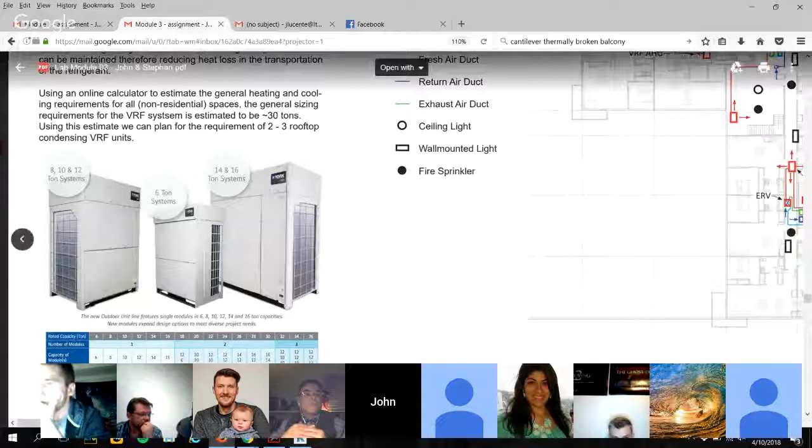We found a website that ran us through a quick estimating for sizing the corridor, and there was a cut sheet for the VRF that said with a sizing of 30 tons, we would need maybe 3 of their big units. Great, so then on the roof plan we connected that to where we would. Right, definitely include that and use it as a reference.

Going forward, this is our typical suite again, same as before, except adding the lights and fire sprinklers. I was just trying to get one sprinkler next to the kitchen, and then one for each of the other rooms. I don't think sprinklers are needed in the restroom though. No, my understanding is they're not. Yeah, we've got to do a study on that.

Was there anything else I should talk about on this? Lights, oh, and we talked about this before: all exposed conduit and ceiling mounted, surface mounted, since we have everything kind of on one side. We're going to do a drop down bulkhead to hide as much of our ductwork as possible, so we could leave the ceiling in the living room and kitchen kind of exposed, and maybe run a perimeter bulkhead.

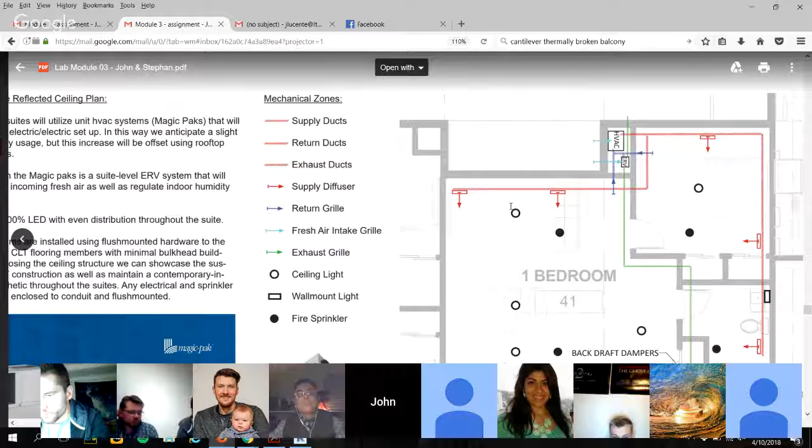So my question would be related to that, although that might not make sense, I don't know yet. Would it make sense to incorporate some of your lighting into that bulkhead? I think so, yeah, clean that up.

I don't mean to quarrel with you guys, because I think you've sort of thought this through, but I'm still intrigued with this structural system as a finish system, and I'm wondering if you have any appetite to consider exposed ductwork, exposed HVAC, exposed sprinklers. Yeah, we were. It's got to be appearance grade though, doesn't it? Yeah, it has to be oval or circular. It's more expensive, but these units are very tight, very tightly organized.

They work off a centrally located Magic Pak. There's not a lot of ductwork run, and as it runs to the limits, to the bathroom for example, in the end of the living room, that ductwork could get smaller.

Yeah, okay. I'm just wondering, did you think of it, or did you just sort of default to concealing it in a bulkhead?

We were thinking there's some value in testing that limit. I think it adds to this contemporary, deconstructed feel with the shown CLT.

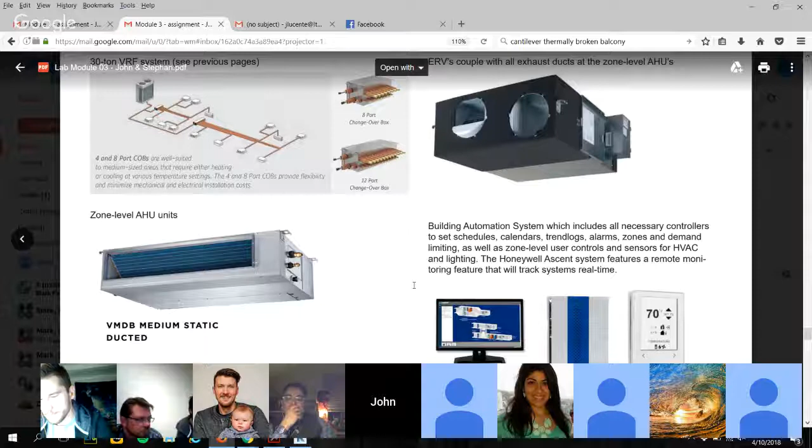Is there a dehumidifier in this package? The only consideration for humidification was the ERV. My understanding is ERVs can help in the dehumidification, but I'm not sure they all have dehumidifiers built in - if not, you're going to have to add one. Because it's Michigan, you've got to have one. We're classified as humid, cool. Dehumidification will help reduce your HVAC load, so that would be in the air handling unit. If not in the air handling unit, it might be a separate element. It's only going to condition the interior air - remember, it's not the exhaust air. Okay, I can look into that for sure.

We got that right, yeah, I got that note. But it may be a box that's somehow behind that - I don't know, let's say behind the drop soffit thing.

Okay, this is our alternate energy. I went to the website for the photovoltaics - 200,000 kilowatt hours per year, which I think sounds good. So that says we'll be offsetting $20,000 in annual energy value. And what percentage of your total load is that, or do you know yet? I forget now, I think I had a ballpark.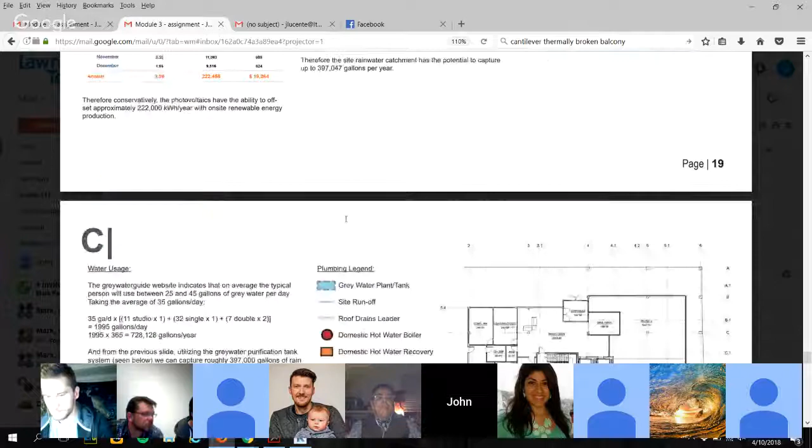Just imagine the weight of that, right, so it's probably got its own foundation. Does that make sense? For a building this large, it's probably going to be like 3 or 4 cars - think of like 3 or 4 vans. So probably... could I just divide this gallons per year? 6 tons or something is what this is going to weigh. I think if you plan for like a 100-year event...

Well, like I say, remember it's not just collection, but it's also the fact that as you collect, you also use it. You're using it, right, that's what I mean. So this 400,000 gallons per year, we could divide that by 12 maybe. Well, yeah, I'm not sure, but what I'm getting at - even if you divide it by 12, you're looking at the fact that you're just collecting.

What I'm saying is your building occupants are using it for toilet flushing and whatever else, right? So you can take that off, you're always borrowing from it, always taking off.

What is the average per gallon consumption of a human in the United States? How many gallons a day? 25 to 45 gallons of gray water per day per person.

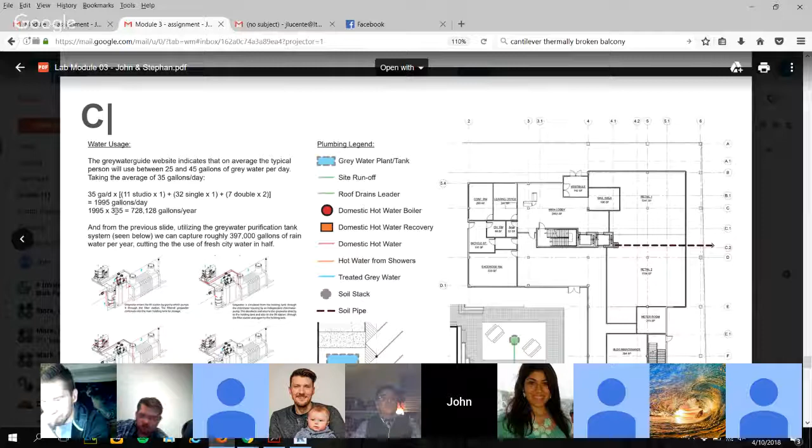Taking the average of 35 gallons a day, I averaged 11 studio apartments times 1 person, 32 single apartments times 1 person, and 7 double apartments times 2 people. We got close to 2,000 gallons per day, times 365, which gave us 730,000 gallons a year.

That's twice your collection then. So we're offsetting half our water, gray water. I don't know what goes into the gray water definition, 25 to 45 seems high to me, but I think it includes washer machine, shower.

Back up a minute. I don't shower with gray water, right? You understand what I'm getting at? The water is not used for just everything. What would be the true gray water percentage of that? Other than toilet flushing water, I don't know what it is. Everything else I encounter will be potable.

All of it needs to be potable except toilet flushing. So that number might be smaller, and your percentage might be much larger than you think. We have to nail that down. But anyway, good work on that.

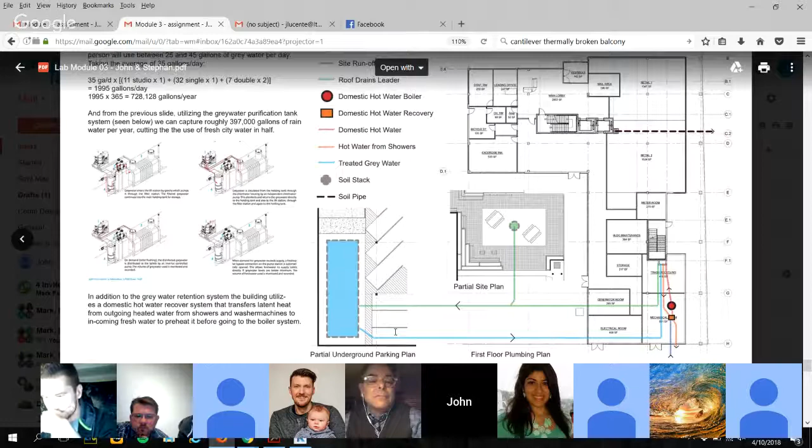This is just showing the general water runs, and fresh water into the mechanical room where we'd have a boiler system. Also, the apartments would want a domestic hot water heat recovery system, so hot water from showers would preheat water going into the boiler. Okay, you're going to find a unit that does that?

Oh yeah, we're going to have to. Because you have to configure that. There is something that does that. I've seen them, but I can't tell you how well they work.

Moving forward, this is our roof plan, showing where the 3 rooftop units would go, and showing rainwater leaders, rainwater roof drains on each. It does look like some of your roof areas are really large for a roof drain, especially that center purple one, that's probably the most. You have a feeling that could be cut down into at least 2 or 3 sections.

And as Professor Farlow pointed out, what's the overflow? That would have to be some sort of scupper, so there's not just 1 drain per section, there's 2. Okay, we'll have to add that and add notes for that.

If we have an overflow scupper, can that just shoot off the side of the building? I guess so, but you'll never see it in your cistern. You'll see it located high and sometimes low. If it's located low, you've got vertical conduit pipe running from the point of intake all the way to the point of discharge, which has a cost impact.

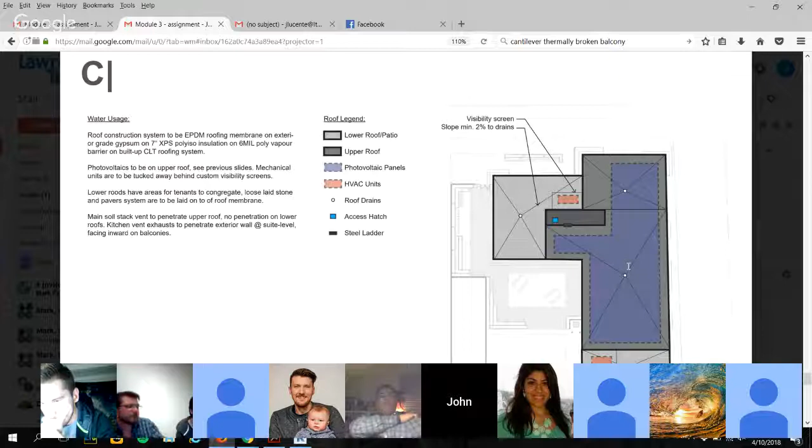I think the last little bit is showing the wall sections. We had the parapet detail, do you want to zoom in on one of them?

You guys need rock wool on the outer wall for continuous insulation? No, but do you need it for fire resistance? Well, we have cement board on top, which would. I know that, but based on the rating, you're going way back to your construction type. What's the exterior wall rating you need?

They're type 4 up there, aren't they? Do you need a non-flammable assembly that includes insulation? Do we need that for Type 4? God, I can't recall off the top of my head. I thought you didn't, but if you do, then it makes sense. But if you don't, and you're encasing this in cement board anyway, yeah.

We could, I guess you could have fires. I mean, that was the problem in London, the fire spread through the insulation in part, right? But if we have fire blocking, that would help. But my point is simple: some of the other insulation types, even though they may have a flammability issue, will give you higher R values.

But we haven't run an Insight 360, though you did already study the ASHRAE code. So you guys are meeting the ASHRAE code requirement? ASHRAE 90.1, are you meeting it, right? We are, yes. Okay.

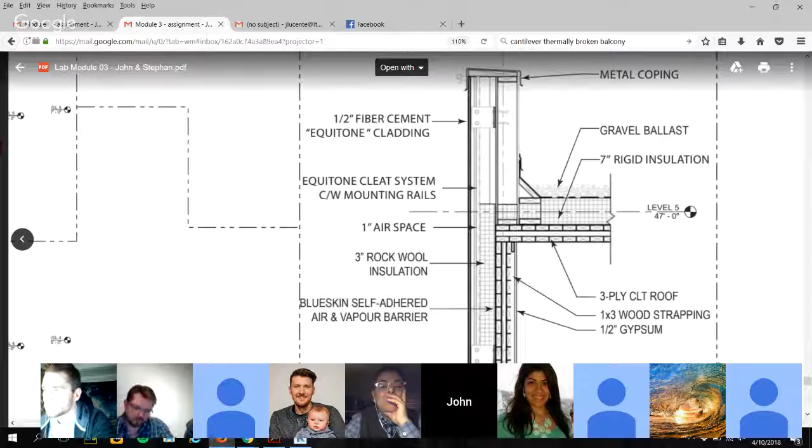I'll give you a hint: unless you're going to do a therm model, you may want to extend a little more insulation in that parapet. I agree, not a lot, but another 6 inches or something. Take it up to the flashing and counter flashing, bring it up and down again to close that loop. Just buffer it out a little bit, clean it out.

Now, remember our conversation a moment ago about exposed, honest systems, and here's a case where you're concealing the wall. So is that gypsum board intended as a constant, or is it an alternate? I would amend that note, or maybe show it as dashed beyond, and have it as required or as specified, something that calls it out as an unusual condition, not a constant.

Yeah, because we wanted to pick a section that had the parapet. That was kind of important to us, and that wall in particular actually did have the drywall.

So okay, let me talk about one more thing: gravel ballast. So that's another expense. Yeah, we could do EPDM.

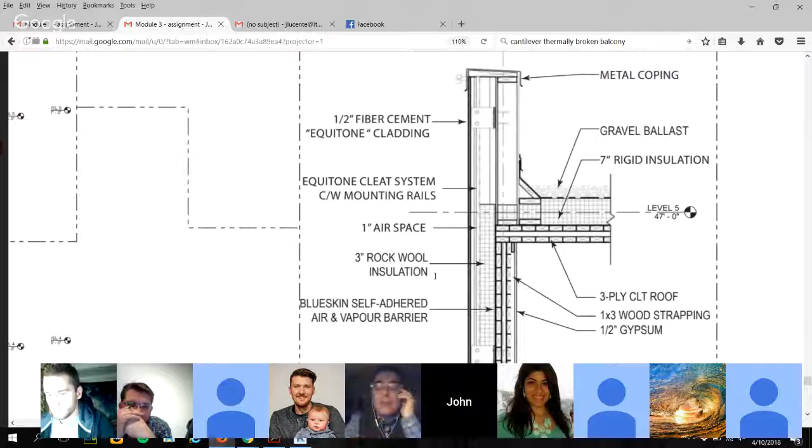I just feel like ballast is what I would specify if I was going to have occupants looking down on the roof and wanting to see it as a beautiful foreground condition appropriate for a condo development. This is not quite that, this is apartments, plus ballast is expensive, and it can get blown off the roof. Have you thought about just adhering the roof and dispensing with the ballast?

We're thinking, on the roof plan there's a note about the finishing on the roof with respect to gravel as well as pavers, because the lower roofs will have occupants going out there experiencing the space. So we wanted... but the upper roof is. But you could cover that with paving elements over the roof, you don't need the gravel. Okay, right.

But where you have hardscape, whatever material you use to occupy the roof, you can hem that in, border it with planters that have grasses in them so you don't necessarily see the gravel. I don't know why I have a big antagonism towards the gravel roof, it's just that it's an expensive proposition.

It's a different roof approach to everything else you're doing. Okay, I might think about doing it the same way. All right, Dan, what's your thoughts on that?

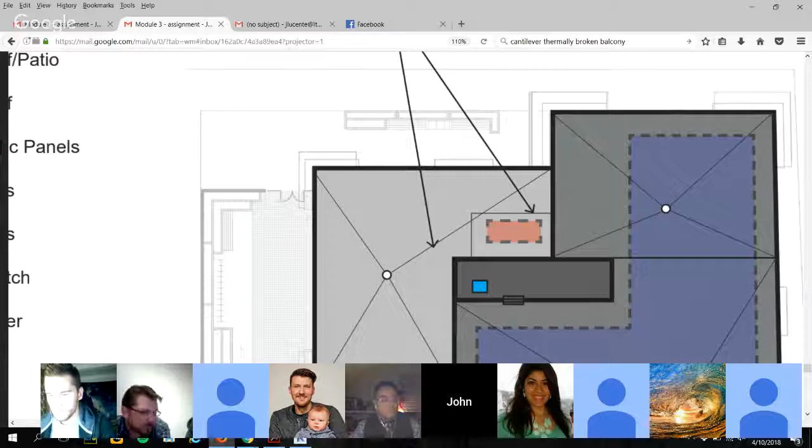Can we go back to the wall section? I want to say that these look really good, by the way. You guys are doing very well on this. I really love the way these are playing out. I'm seeing the datums, I'm seeing the materials drawn graphically in section. I'm seeing windows sitting in the beef of the wall, not in the insulation. I'm seeing clips tied back to the structure.

Guys, keep in mind I've got to see headers above windows, and I have to know that there's something as an exterior finish on the back side of the parapet where the roof runs up, but you're showing the counter flashing and flashing. So you need some sort of material — it could be anything, it could be more cement board, it could be vinyl siding. It doesn't matter, but I think the note's missing.

It looks like there's something there, but just the note's missing. It could be the roof — the roof can extend all the way up to the coping. If it's a big single ply, just pull it all the way up. That's a different detail, but it's a detail you can quickly illustrate by modifying this detail.

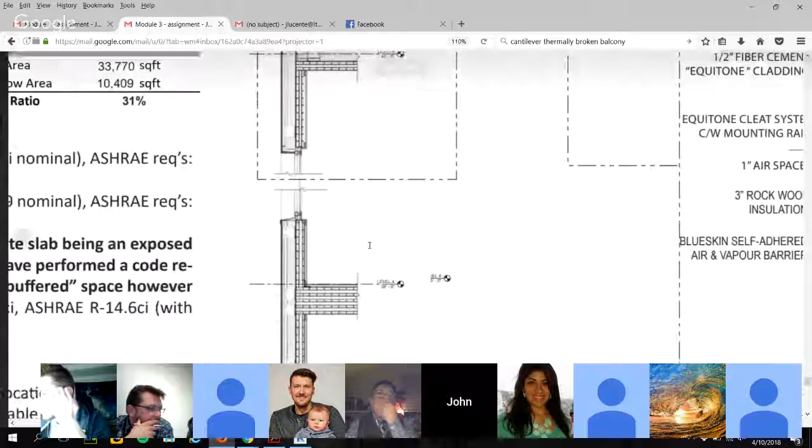So again, please, lintels above windows. Remember, heads do not connect back to the underside of the lintel — heads float under lintels, right? But it looks like excellent work in terms of developing this, and you're cognizant of your insulation values, and seem to be cognizant of some issues like thermal breaks.

Yeah, can you zoom? Stay where you are, go to the right to that little wall section detail there. Move over and zoom in on that. Can't zoom in any further. Zoom it. Okay, yeah, you understand there's a head issue there, a lintel issue there. I don't know quite how that wall is going to float on that — there might be a flashing issue in there too.

We'll touch that up — yeah, that needs some detailing. And it looks like there's a little concrete sort of small mini wall below. We wanted to put in at least a minimum couple of inches of ledge because of snowfall and stones. It would be a nightmare for flashing otherwise, and there are things we've got to clean up.

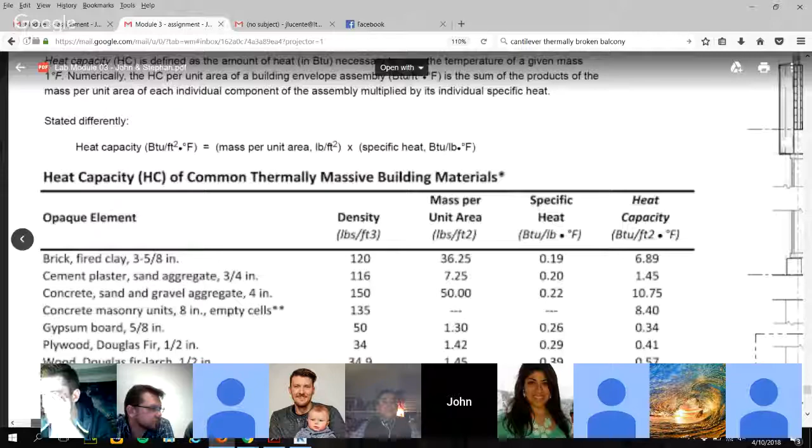It's still — right, so you guys are in good shape. Values coming out — are you guys meeting ASHRAE 189? 90.1 for sure, I can't say if we're meeting 189 or not. 189.1 is the research we did at the beginning with Andrew. You guys are supposed to be using it.

Okay, you guys are also doing the energy modeling that Dustin talked about last week, right? That's one of your options, so you should start processing that. I'm glad you're doing that one. We were going to run it and see where that sort of lays us out, and then maybe we end up saying, oh, we really have to add more insulation.

And I do want you to do the following when you start collecting those runs, because you saw what Dustin had — he had his initial run, and then he has the ability to make modifications on the fly. I want you to document every one of those modifications you make and see how you're clocking down, so to speak, in terms of your energy utilization. You know what I'm getting at? So you say, okay, here's my initial run, then I do this, and then I do that, and this is how I get to where I'm at the end.

Okay, want to see how that's documented and understood, because basically someone's going to put that image on the screen and say, here's what Insight 360 told me about this, and then there's going to be a pause and no one's going to say anything, and we're going to wonder why it's there. But you're going to tell us what you learned from that — just break it down. That's what everyone needs to do, correct? That makes sense? Okay.

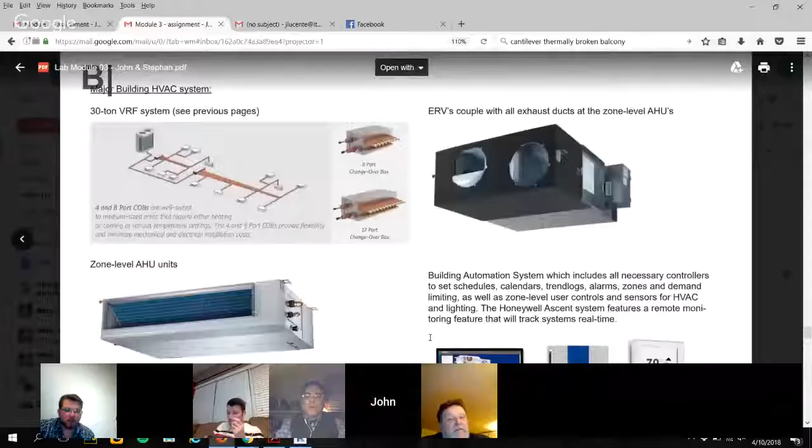Oh, vaguely I'm remembering that now. Thanks, Nathan. Here we go, let me share my screen really quickly. Share. Okay, so we had this.

Yes, we started talking about opening up that corner. Yeah, oh, this is a good model. One second, sorry, it's just very slow right now with everything - kind of a wrong view. You might need to turn off some of your stuff while you're firing through this, right? No, that's you, it's your computer.

Yeah, so we're looking at - what's it called - putting in a bunch of smaller columns and infusing them into our glazing to make it look like we're using those columns as mullions. Yeah, at that condition. Yeah.

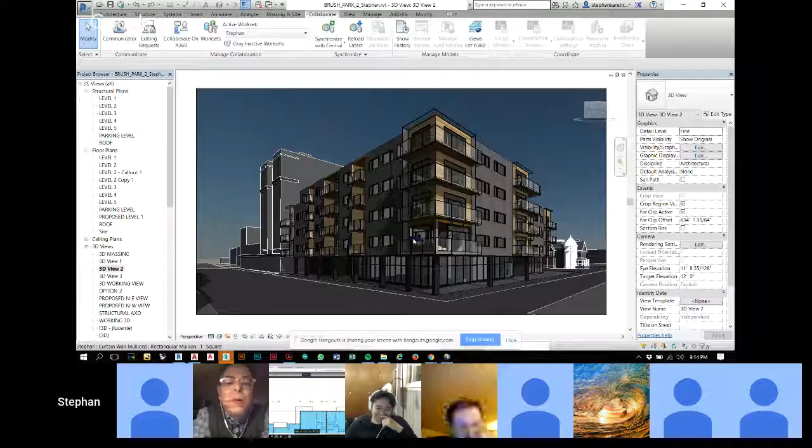Any thoughts on if that's the way? So what's happening? Can you zoom in a little bit? What's happening?

So right now, this is still a work in progress. Like these columns are too big. The main issue we're having is how do we cantilever the balcony while removing a column in the corner, but not adding a column on the outside of the balcony and not having a thermal bridge. We're trying to balance all these things. For the last 4 hours, we've been bouncing ideas back and forth. So we're wondering if we could have a sit down at some point to talk about it.

Sure, yeah, over this weekend. It would help, for my sake, if you had a couple of views like this, maybe as screenshots, and then a couple of plans cut that show structure and the normal line of the building, and then the cantilever, the balcony edge. If we could look at that.

I would even be amenable to looking at that a little early on Thursday, or staying late on Thursday, or we could look at it later this week. I was thinking maybe Saturday, because I've got a few other things for the other classes that I have. I'm good with that. And then I'll prepare, we'll sit down. Are you on campus at any time, Mark?

Saturday? No, or like any day. But I will be on campus Thursday before this class. My other class finishes up around 5:15 to 5:30. I'm not going to... well, what should we do? No, I won't have time to finish it. How about Thursday or Saturday? Yeah, Saturday, let's do Saturday.